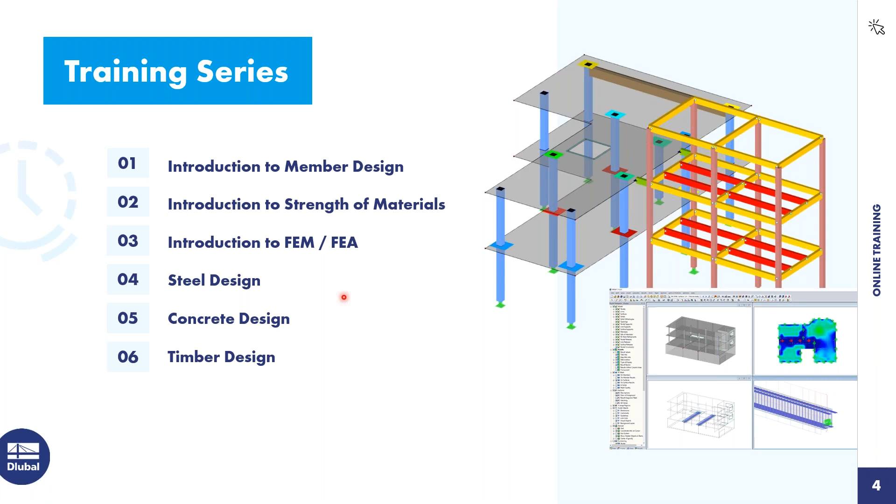Good, so our training series, 6 parts today, the 5th part, the concrete design. And what can you expect from today? First of all, we start with an introductory example. We will model together a concrete beam with a cantilever. And then I will forward to Juliane and she will show you how to design our concrete slab. So let's jump right into it.

No theory, only modeling in RFEM 6. So I will open this example and create a new model. For this case, I think it's familiar for you. I'll go to File or click on New Model. And now I create in this dialog a new model with the name concrete beam. I will leave it as a 3D type of model and everything else as set.

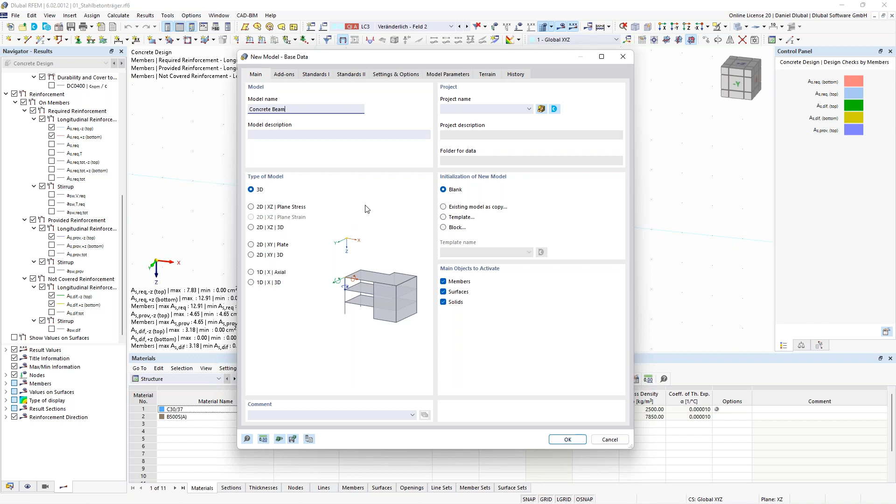Now for me, it's important to activate the add-on concrete design. So here we go to the design add-ons, activate concrete design, because then we get additional design properties for our concrete beams or concrete slabs. So I have to activate this.

When I have activated this, I go to the 3rd tab, Standards. Here in the Standards, I see different chapters like for the design, standard group, load results, and also load case classification. Here I want to design it according to the Eurocode, with this national annex of Europe. I will leave it like that and just click OK.

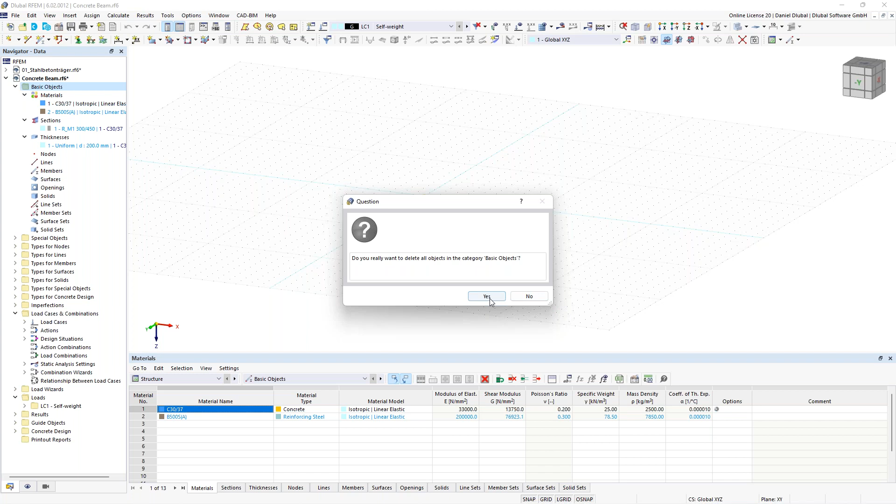And a new window opens. As you can see on the left side, I already have some materials and section thicknesses. They are remembered from the last project I did. So I will delete them in order to create all these 3 things anew, just to show you how to do it. You can click on basic objects with right click and say, delete all basic objects. Now we can create it from scratch.

Before we do this, I would like to know from you if you already have some skills in concrete design with structural analysis programs, just to give me a kind of status about your knowledge regarding your concrete design skills. So I have prepared a poll, which I will start right now. Please answer these questions in order to give me feedback about your knowledge.

Okay, most of you have voted. I close this and share the results. So most of you have already designed concrete structures in a structural analysis program, I hope it was RFEM 6 or RFEM 5. For those who don't have this experience, that doesn't matter, you'll learn it today.

So again, back to RFEM. Here on the left side in the data navigator, I will create two materials, because for concrete structures we need two materials: one concrete and one material for the reinforcing steel. I go here to new material, and one of the biggest advantages in RFEM 6 is that I can search for a material via this text box. I enter C30/37. I am from Germany, so I will design according to the Eurocode, because this is the only standard I know, and this is why I choose this one.

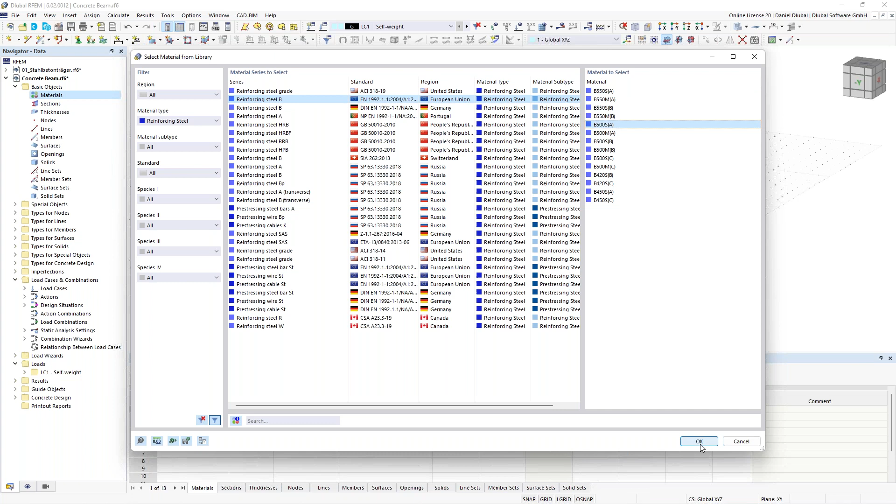Next, I create a new material again. I go to the material library and look for the material type reinforcing steel, where I can filter according to different material types, and the one I'm looking for is reinforcing steel B. Here I see different things: B500 or B550 refers to the yield strength, A and B refer to the ductility class - A is normal, B is high ductility - and S is for normal member reinforcing steel, M for mesh reinforcement. In this case I choose B500 SA, click OK, and that was it. I click OK again.

The next one is to create a new section. Since we will model and design a concrete beam, I click on section, new section, and I have to choose this rectangle massive cross section - or if you don't have it, go to the cross section library and choose massive rectangle. Then I give here the geometry: a width of 300 millimeters and a height of 450 millimeters. I can also see the section values according to this geometry and the stress points, and if I want, I can show the unit stresses. Not so important in concrete design, but we have implemented it here too. That's everything, I click OK.

Thicknesses, I won't do right now - this will be more the part of Juliane, because she will show you what thicknesses are. Thicknesses are similar to the cross-section things for members. It's a similar concept: thicknesses you need for surfaces, and sections for members.

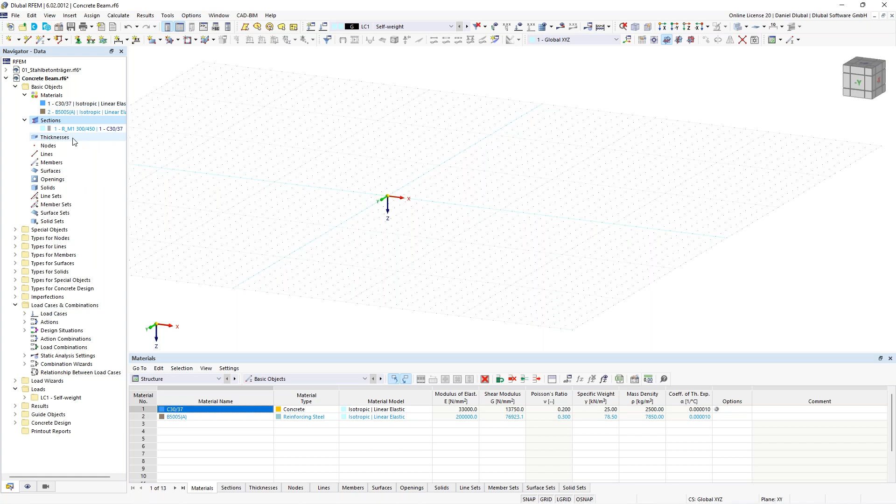Okay, so now we will model it together. We will model the beam. I go to the symbol bar, click new single member, and choose the right section since I only have one. That's everything, so I click OK and draw this member 8 meters long. I can do this via the grid points or by inserting the member length, like 8 meters. As you can already see, we already have the provided reinforcement based on some general information about this concrete beam. We can modify it afterwards, of course.

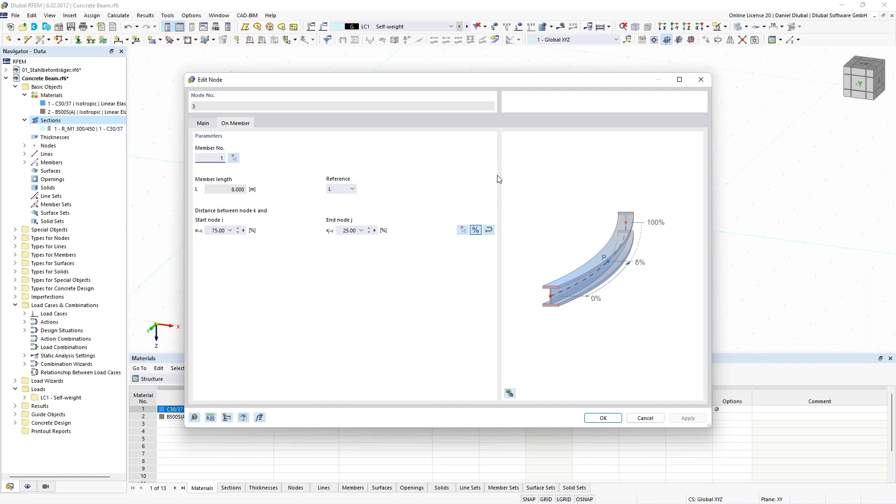What I want to do now is divide this member internally, so the member remains as one member, but we add an internal node. Double click the member, activate the option nodes on member, and switch to an absolute distance. I say from start, please 6 meters away, and here you should create a new node. I click OK, and you see this blue node. Double click this node - it has the node type 'on member'. This is a really nice opportunity, giving this node the option to be part of this member without dividing it.

Okay, so the next thing: supports, node support. I create a new nodal support. I want to activate the rotational around the global X axis in order to prevent torsion, and then a roller support along the X axis. This is this one, I click OK. Perfect, okay, so much for the modeling.

Now let's go to the load cases. I go to the symbol bar, edit active load case, and here I have the self-weight - this is okay for me. Now I also want to consider an imposed load case. In this case we have two fields, one field and the second field, so I create the first one: imposed load field 1. Now I copy it and create field 2. Now I choose load case 1, because then I jump to load case 1 where I set some loadings.

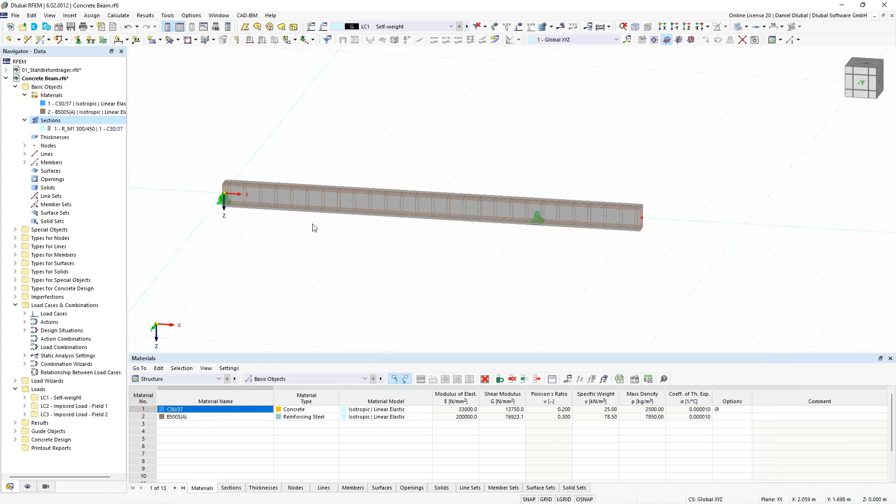So the whole concrete beam has a member load of 10 kilonewton per meter. I click here on member load and insert a value of 10 kilonewton per meter.

Now the biggest advantage here in RFEM 6 is that I can stay here in this dialog, just select the same member, and then afterwards just change the load case and add parameters like the load magnitude again to the members. I don't have to leave this window. This is a real good advantage.

So I click here on this member, say apply and next. Now I change the load case, and now I have to change the load distribution because we only want to apply the load on the left field. So I say trapezoidal. Here I have 20 kilonewton per meter, 20 kilonewton per meter on the right side, and the load distance goes from 0 to 6 meters.

I say in this member, please apply and next. Now I change the field and say from 6 to 8. I can insert here 1, say okay. Now let's do a check. Okay, seems good. So back to the load cases.

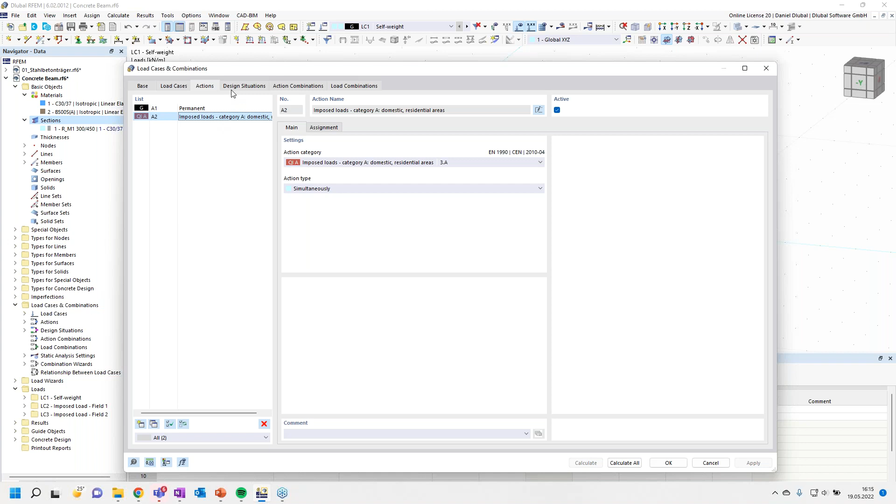Maybe a few words to that. So we have here this load case classification according to this European standard, the Eurocode, and we have also this combination wizard, which helps me combine different load cases with each other, considering the partial factors. We see here also these different actions, and depending on these actions, it will get me the right factors for combining it, and according to the design situations, it will combine it.

So you can also take a closer look at the combination rules, like here. And for our simple example, we don't need so many design situations. So these two serviceability design situations, like characteristic and frequent, I will delete. I only need this ultimate limit state and this serviceability design situation, quasi-permanent.

And let's go to the action combinations. Here, these are the factors I need for my load combination. Okay, good, this is everything. Now click on OK. And now I need to define my design properties for my concrete design.

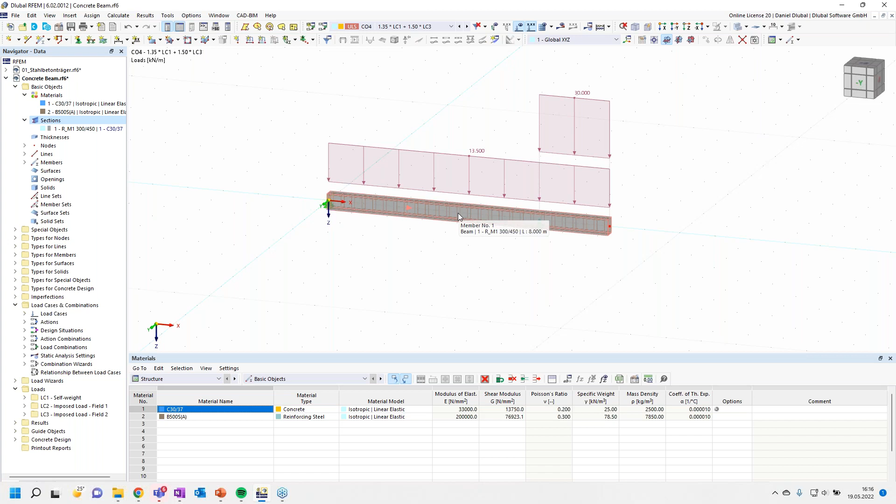So where can I do this? Double click on the member of this concrete member, and now you see here the design properties. When I have activated the add-on in the base data for concrete design, then this option will be activated automatically. I can also deactivate this, and now you see all these registers in the upper menu will disappear when activated. The other tabs are there.

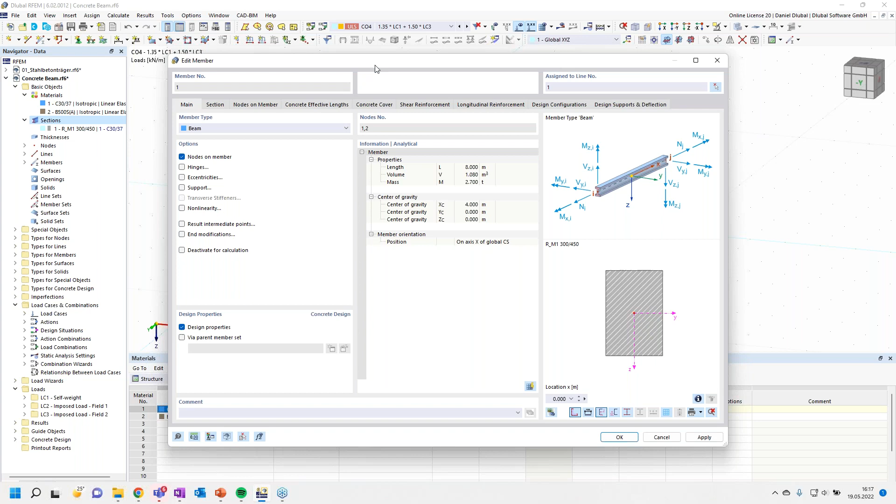So what we do now is go through these tabs. What we don't need is the concrete effective length for any stability proofs, but this is a classical bending member, so I can neglect this.

So I go here to the concrete cover. The concrete cover is pretty clear. You have different exposition classes in order to determine the concrete durability. So you can open this. Now it's for all section sides. You can modify it. You see here these different exposure classes, or exposition classes - this was the wrong word.

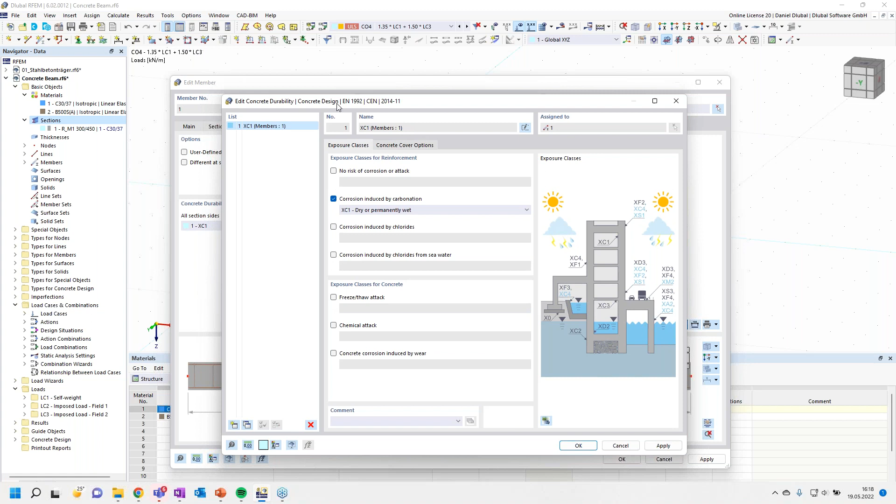Exposure classes. Here you have XC1 up to XC4 due to corrosion induced by carbonation, or also here when I want to consider exposure classes for concrete freeze-thaw attack, and so on. Through these exposure classes, the minimum concrete cover is determined.

So for our simple example, this simple XC1 is okay. I say okay again, and this minimum concrete cover is determined from the outer edge of the concrete rectangle to the outer edge of my stirrup reinforcement. And these are 20 millimeters, determined by the exposure classes.

I can also say a user-defined concrete cover, or when I want to consider it for each side differently, I can activate here also this different at section sides option. Okay, so much to the concrete cover. Now let's go to the shear reinforcement.

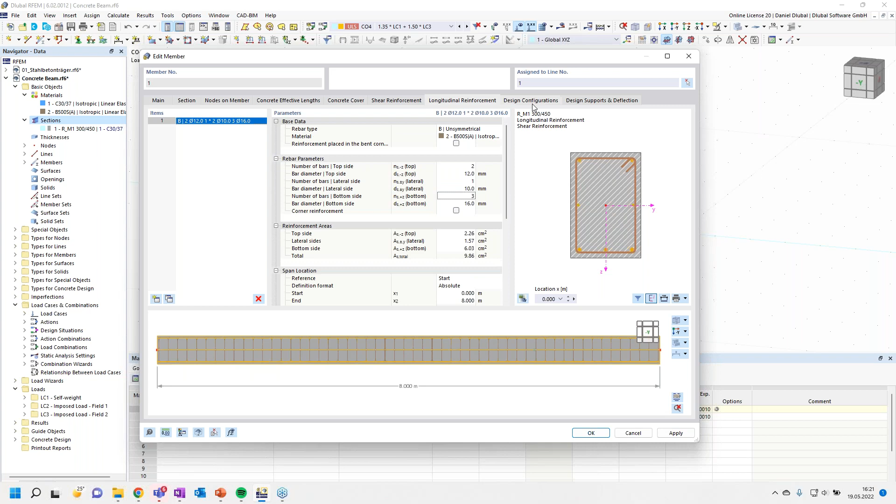Now, design configuration. Here you find more information about the different design parameters, like design parameters regarding considering internal forces for concrete design and so much more, also the reduction of internal forces in Z direction. In this case, I activate the limited moment redistribution of the supporting moments, and also the reduction of the moments at the face of monolithic support according to this standard.

So yeah, here you can define also several other options for the design of concrete. These are the information given by the standards. And the same also for the serviceability, with some more information.

Now the last tab is the design supports and deflection. When you want to design the deflections, the deformation proof, you have defined here different design supports. We do this for this simple beam. I create a new one with a support width of 360 millimeters, no inner support, only support in Z-axis.

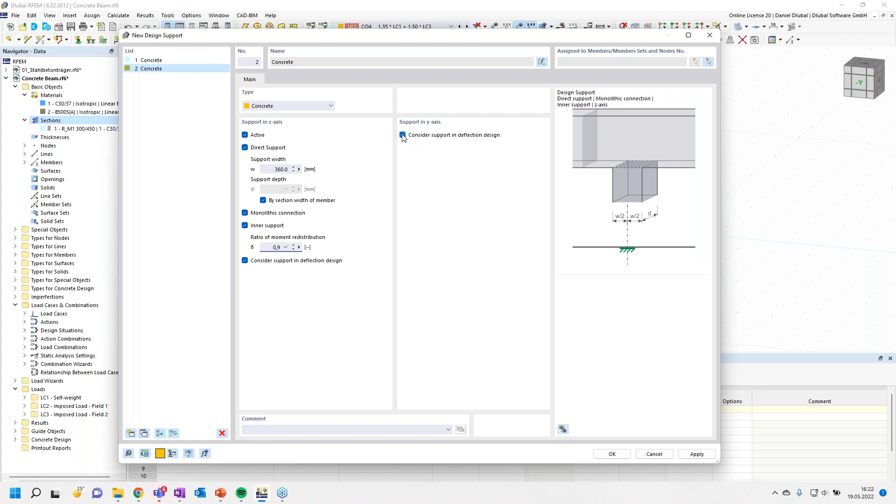Now I create a new one, also with 360 millimeters. It has a monolithic connection, and the ratio of moment is in this case 0.9, and I don't need to consider any Y-axis. I click on OK.

Now I have to assign it to the right nodes. So that is on member start, this is correct. And now here to the middle, the second one... no, this is not correct. Now this is correct. I say OK.

And now I can calculate it. Let's say concrete design. And now you see how the whole situations are calculated, also for the serviceability.

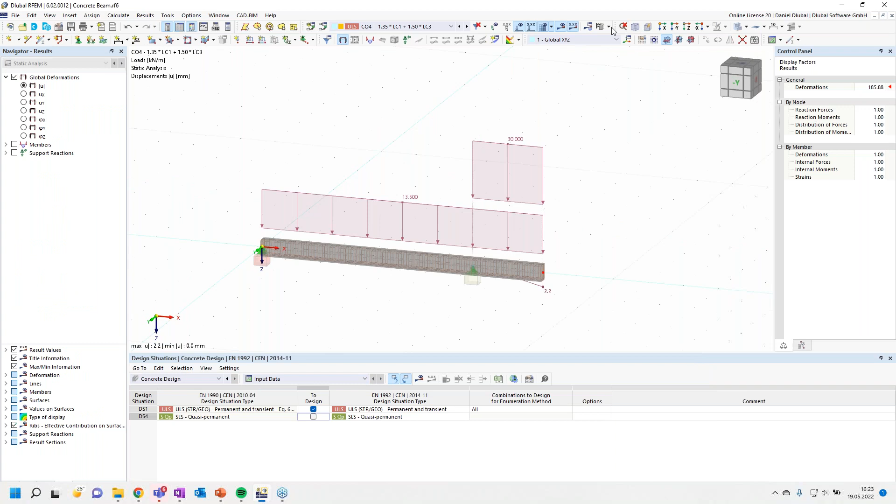What I don't need is to design for the serviceability limit state, I only am interested in the results of my ultimate limit state. So I calculate the concrete design again. And now I see here the different design ratios for members, and I see detailing of members, and also the ultimate limit state section resistance is not fulfilled.

So what can I do? I need to strengthen my reinforcement.

Maybe here some words to this reinforcement. Here on the left side, I see the results navigator, and here I have the possibility to show me different results, like the reinforcement.

So I see here the required reinforcement for the top and the bottom, maybe I deactivate the design check. I can show me the required reinforcement for the top and the bottom, I can show me also the stirrups and also the provided reinforcement for the bottom side.

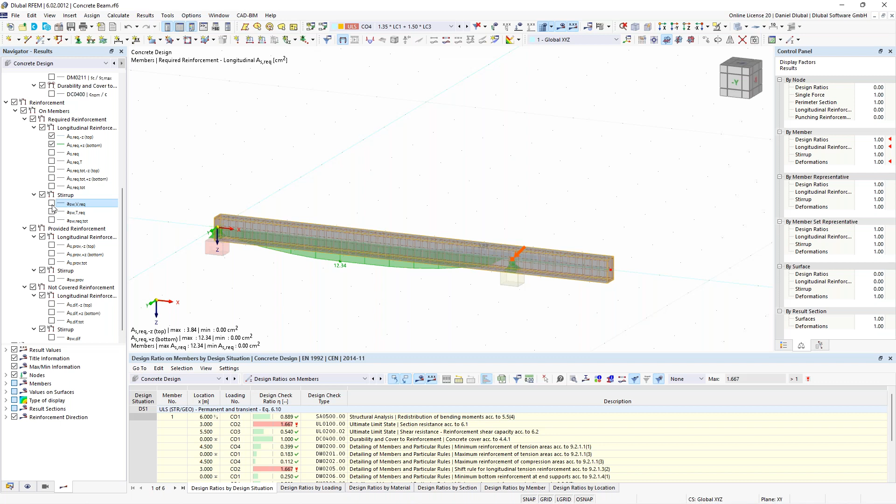And I can deactivate here the rendering of the reinforcement by going here to the display navigator, go here to types of concrete design and deactivate it. And now I can see here the result a little bit better. So I see, okay, my provided reinforcement is lower than the required reinforcement.

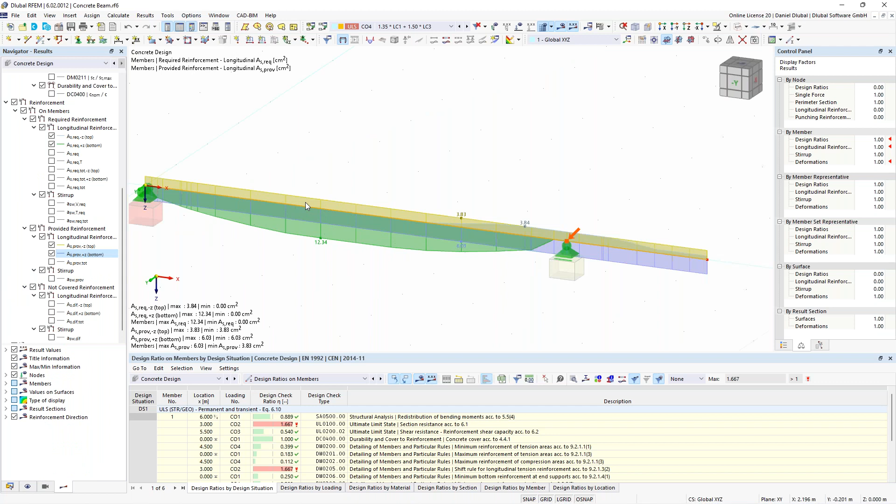So I need to add some more rebars. And also in order to calculate here the difference, what I need, so the not covered reinforcement, I can also show me it. Okay, so what can I do?

Go back to the concrete beam, go here to the shear reinforcement. Now we want to add more rebars for some places. So I go here and copy it.

And now I want to cover it for different fields. So you see, okay, the start and end goes from 0 to 4. I say, okay, this should go to 6. And this one should go from 5 to 7 with distance of 0.1 meter. And the other one should go from 7 to 8 meters. And the longitudinal reinforcement, let's make it quite easy.

So what can I do here is just increase the diameter for my top side and add here a diameter for the bottom side to 20 with 2 bars more. And it looks like that. I can show me also this reinforcement plan by clicking here this icon, and I see it here like that. Then I click OK, I design it again.

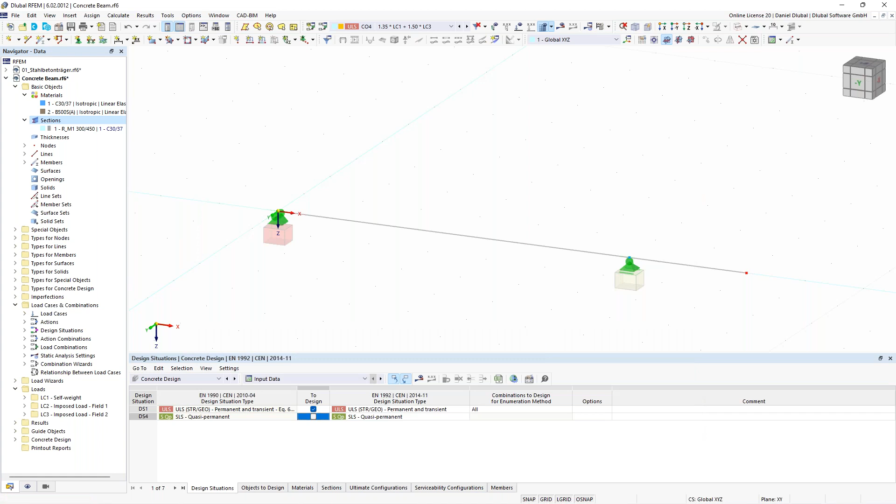And now I see here my fulfilled design check ratios. And by clicking on one of this, like this one, you see also here this design check. Also, you can switch here to different design checks. So in this case, we have here the design check according to this standard, shear resistance, reinforcement shear capacity.

And when you are studying and you want to compare your results with the results of our program, then you have here an overview of how the program did this. Okay, so much to the beam design.

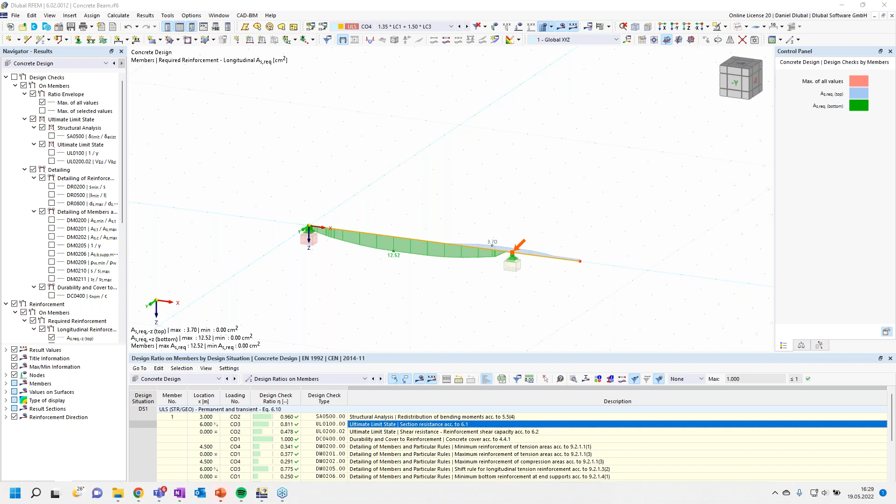The parts of the structure will be of material C30/37, and the wall and columns will have concrete C25/30. We will have the self-weight as a load and apply also a live load of 3 kilonewtons per meter square.

Then we will again do the load combinations and let the program generate them for us. After that, we will do the analysis and use the results for the concrete design. So this is it so far as a preparation.

Now we can go into the program and start modeling. I will open a new model with this icon, and we get into the base data dialog. I enter the name, it will be a slab, made of reinforced concrete, and I give this as additional information.

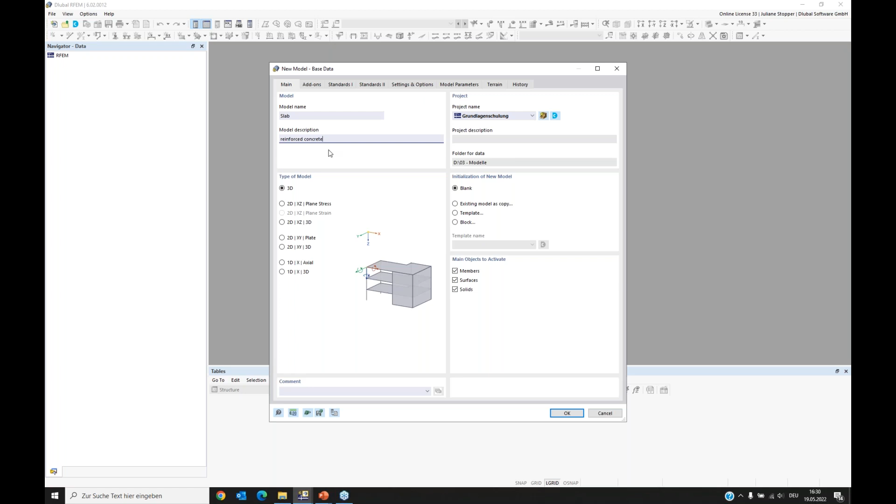The other settings we don't need to change. Again, we have to activate our design add-on, the concrete design, and in the standards I also want to keep the National Annex CEN, as Daniel did. So we can agree and say okay, this is okay.

So now an empty model is prepared for us and we can start modeling. I would like to use a guide object with you, a background layer.

We have a drawing from the architect in DXF format, and we can use it as orientation to create our RFEM6 model. I get the file from my folder and have here the ground plan for our slab. We have the preview, and checking it I can see I need to rotate it by an angle of 180 degrees around the y-axis.

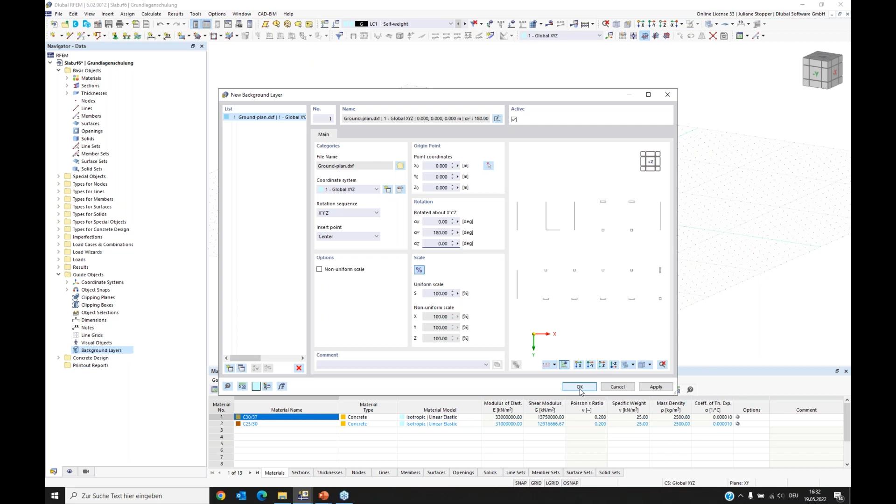Now in my preview, I see this is what I wanted. I want the ground plan positioned like this as a background layer. So I can say okay, and I have it in my model now.

So all these lines are DXF objects. Now I need to create my objects that I can use for the RFEM6 model and the analysis. At first I want to start with the lines. I will create the boundary lines for the slab. We have one here, and we have one here.

If you want to end any process you are in, you can do it with right click, and you can leave the thing you are doing currently.

So now I want to copy this line. I select it, press Control, click on the line and draw it to here. Okay, and I will do the same with this line. I press Control and put it here, and I've finished my boundary lines.

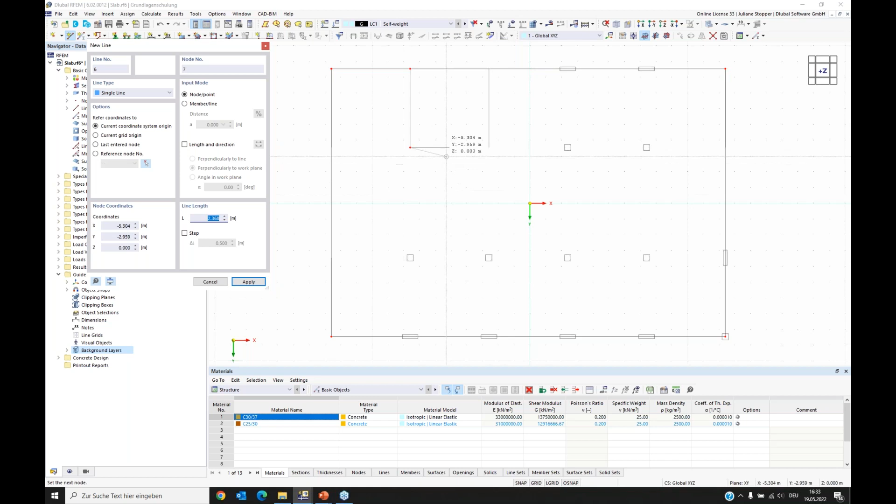Then I also want to have lines here, because the lines we see are DXF objects, and I need to have parts of the structure modeled with RFEM6 objects.

Okay, so what I also need is nodes. I need nodes for the places where the supports or columns are placed. So I put some nodes. I will do it here.

And I can see that I need an X value of 2.40, but I cannot reach here correctly. So I put this node here, and another one here. And now I can edit this node. I double clicked on it and I can see the coordinates here.

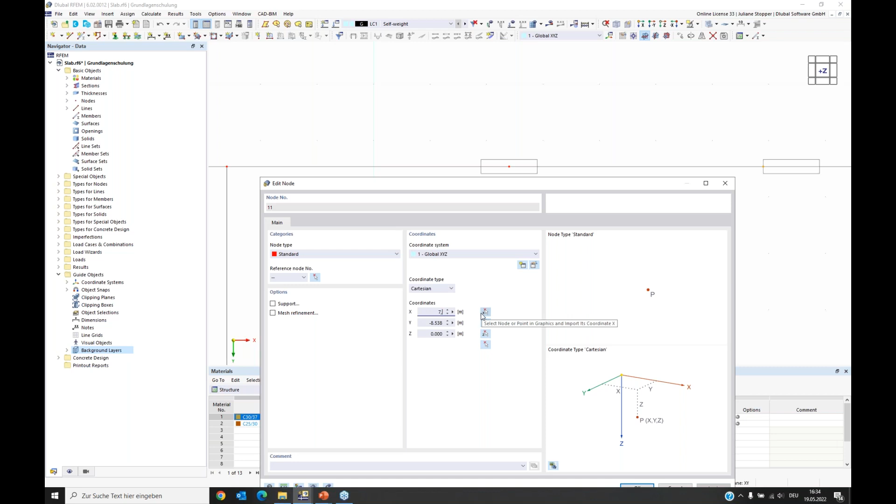And as we saw, I need 2.40. I can say okay, and it goes there. And here I checked it, I need 7.40, and then it will be at the right place. So now I prepared the nodes on that line, and I need them in this line and this axis as well.

So I have to select them. I want to copy them.

With pressing Control, I can again and again add the selection. Okay, now I want to use drag and drop. I again press Control and I can take the node and copies are created, and I can put them at the place where I want them. Here's the end of the wall and it fits. And now I can see the newly created nodes again are selected, so I can go on with them.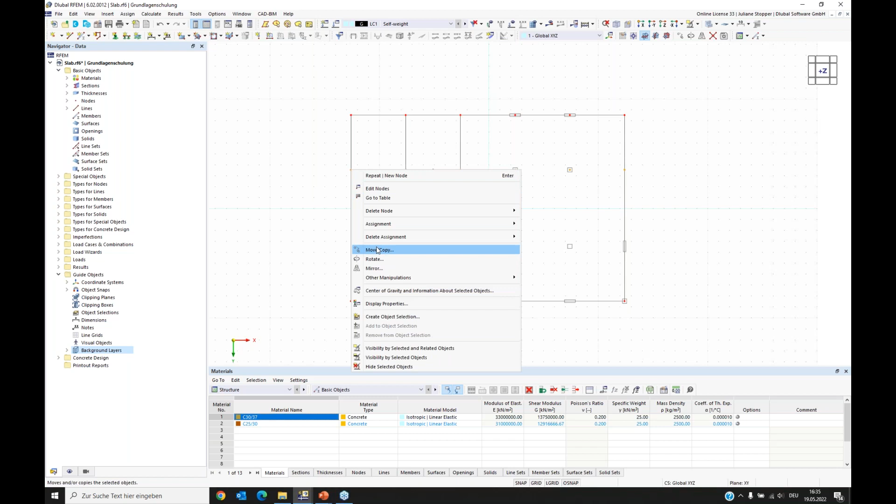Now I want to show you this menu. I did a right click on the node. I also can use this move and copy option. I say I want to create a copy and I have to give the displacement vector here. And now I want a vector like this. I can say apply, and I can see the program copied it, and I can repeat this and do another copy into this row and say OK. And now I see I have all the nodes that I need for modeling.

Now there is one thing I want to do. I want to divide this line into parts, because when I want to define the surface, I want the surface to be within these lines. So I shouldn't have a line that is not divided. In order to do this, I select all my lines and I can use this option here. And now every line is divided at the nodes or lines that it's connected with.

Okay, now I prepared the first step of the geometry. Now I also want to use the data navigator and work from top to bottom like this. At first we want to check the materials, have a look at the list.

I also have the first two materials from my last model and I want to use them with you. It's the C30/37 and also the C25/30 that we need. One material is missing, our reinforcement steel. So we go to the library and choose for European Union the steel, and I want to have this.

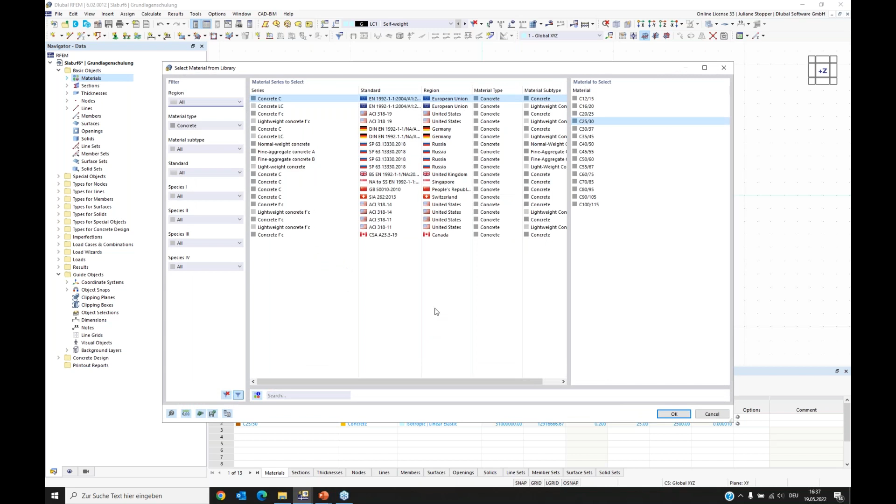What I remembered now is here I will check this. We will have a look here. No, it's okay. I checked the standard because it's important that the standard fits to the standard you selected at the beginning. But it fits, I have the right standard. Okay, so now my material list is fine.

I can say OK and leave this dialog. Then we can go to sections. And I also want to delete it so that we can create it together. We create a new section. And yeah, it's right, it's going to be the section of our L-beam. And it has the same material like the slab.

And here we have provided cross-section types for beams, and we are right, we want to use the rectangular. We can go to this dialog for entering the dimensions. Now I will show you. We want to create our L-beam, so we have 24 centimeters and 45 centimeters in the height.

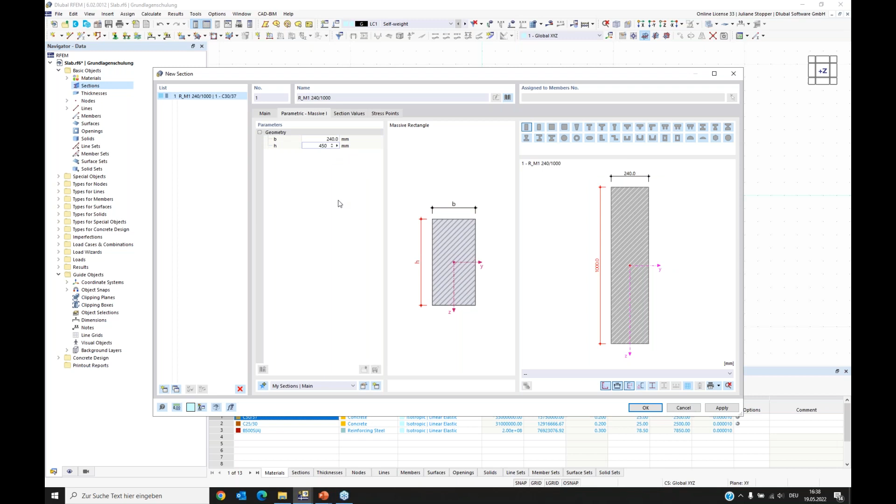And we can enter this: 24 centimeters and 45 centimeters, so 450 millimeters. Okay, then I have my section prepared for the L-beam, and I also will prepare the thickness that I need for the surface. As Daniel said, for beams, for 1D members, you need 2D cross sections, and for our surface, which is a 2D member, we need only to define the third dimension, the thickness for it.

So we can go here. We have the dialog for the thickness. It shall be a uniform thickness. This is right, it's the material for the slab. It's also right, but it has to be 24 centimeters, so 240 millimeters. Okay, and I say okay.

Now I prepared my cross sections. Then I can go on with creating the surface. I could do this from here, but I want to use an option we can reach here more easily. We can define a surface via the selection of boundary lines, and this is what I want to use now.

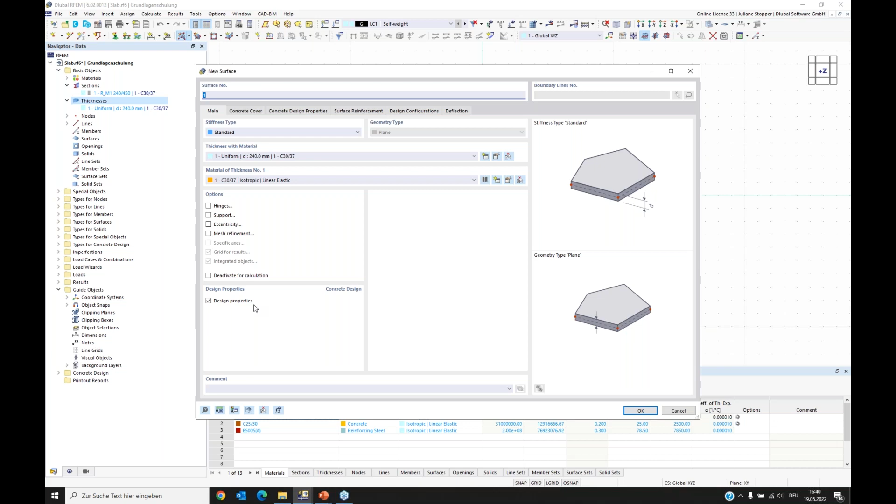Here we see the dialog for the surface. Here we can enter all the things, all the options the surface has, all the settings and input the surface needs. And it shall be a stiffness type standard. This is good, we have the right thickness and the right material. As we can see, because we applied the concrete design add-on, we also have design properties. Those I want to have a look with you at later. Okay, so we can agree. And now the program, if we go into our working window, the program tells us what to do. You can read it here.

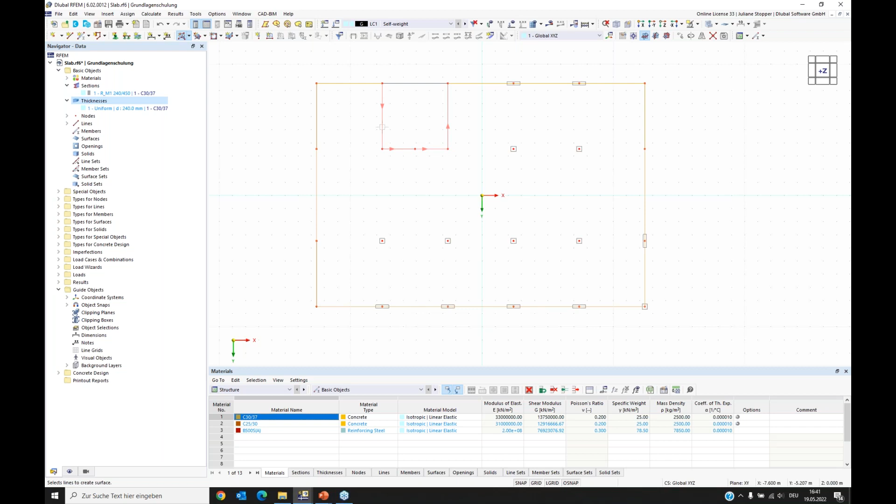When I go back with my mouse into the field, we can see that now we are supposed to select the lines for creating the surface. So I just select the lines, and RFEM6 created the slab, the surface. Okay, I can leave this.

I do a right click, and now I'm free again. So now I want to create the L-beams. The L-beams are positioned everywhere where no wall is positioned at the border lines. So I select all the lines that will get or receive an L-beam between the columns. Here's going to be a wall, so I go on here. We have a wall here. Here shall be an L-beam, and here are going to be walls. So my lines are selected.

I can do a right click on the line and say edit lines, and I come into the dialog for editing lines. Here I have the option to say that for these lines, there shall be a member along these lines. Then we activate it, and when we activate it, we get into the dialog for defining the member. Here we can see the member type we have to set in the main window.

We have a special member type for L-beams or T-beams. It's called RIB in RFEM6, and I selected it. Here you can see we want this type of member. And with entering RIB, we see that a new register opened, and we have to look at it. Here you can decide whether your beam shall be below or above or maybe centric in the surface. We choose the one it shall be positioned below. Okay, then we can go on.

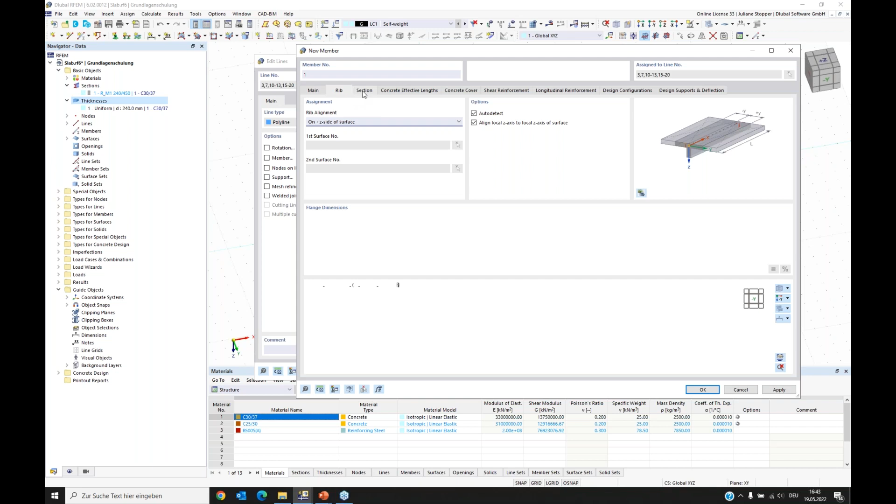We go into section. We have to define the section for the member, for the part below of the surface. And RFEM6 automatically applied the first cross section that we defined. So this is the right one. This is the one we defined, and the material is right as well.

We can say okay. What I want to do is switch off the design properties, because today our main focus is on the slab, and we don't want to analyze the design for the RIB as well. So I switch off the design properties. The program then knows that these RIBs shall not be considered in the concrete design. I say okay and leave this dialog. Now all these lines have these members that we defined applied, and we can see it in the main window.

Now we finished actually the structure. As I said, we want to have the design for the slab, so we are not interested in the inner forces or stresses or strains in the walls or in the columns. That's why we don't need to model them.

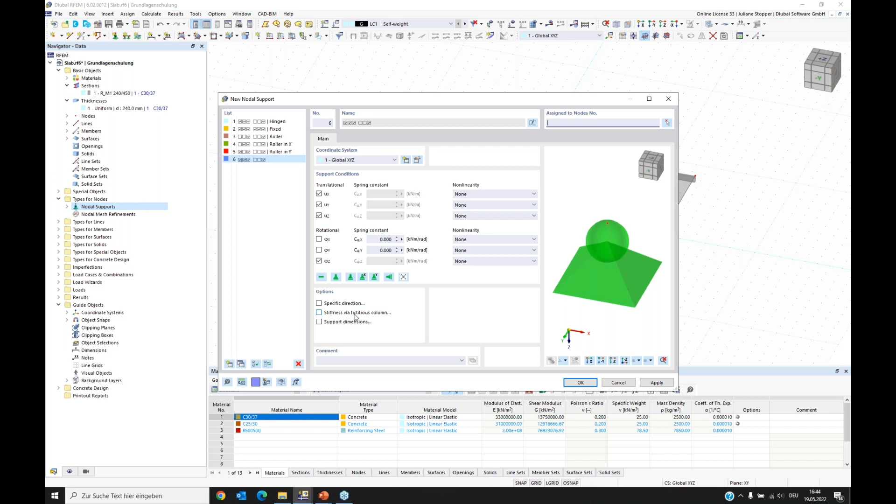We have a special type of supports that I want to show you. First, we go into the types for nodes. Here we can find nodal supports, and I want to create a new one. We have in RFEM6 the option to give a support that contains the stiffness via fictitious column. This means I can activate it, and then a new register is opened and we have a look at it.

Here we can enter the dimensions and the material of the column, and RFEM6 from this information calculates the stiffness the column has. So we can model a support that behaves, from a point of stiffness, like a column behaves, but we don't need to model the column, and we don't get inner forces or something. We are not interested in it.

So I can choose here elastic nodal support. This is what I want to have. Our column has dimension 40 centimeter and 40 centimeter in the other direction, and it has a height of 2.25 meter. Yes, and it is hinged at base and head. And I have to take care, I should change the material. We have less stiff material here, and this is the stiffness of the spring the program calculates from these column dimensions and material.

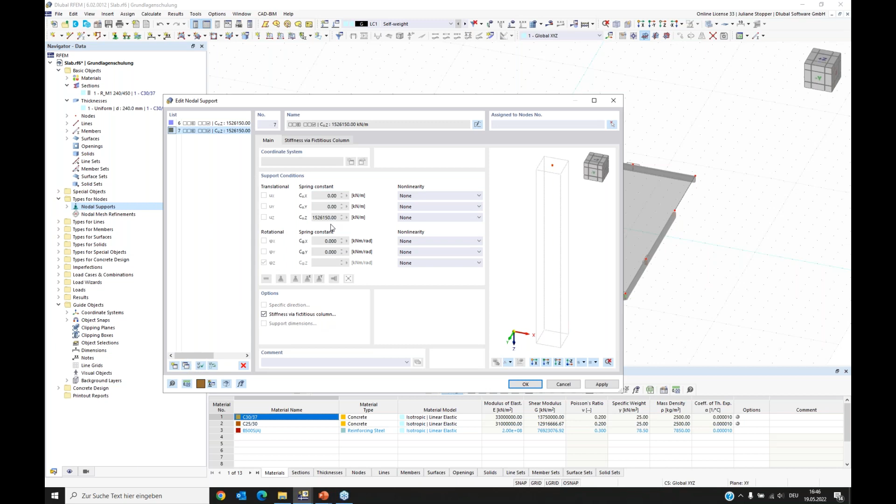It fits 25 centimeters in the height. The height of the column is 3.25 meters. This is right. And the other settings we can keep, it's right from the copy.

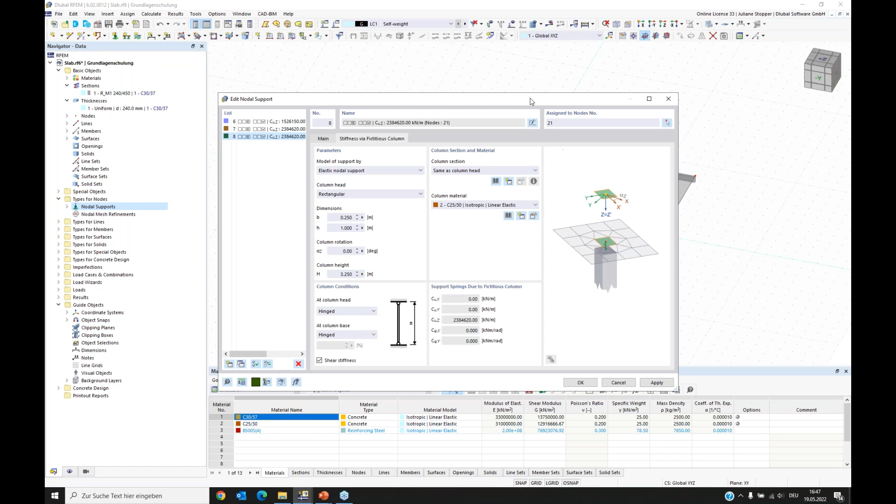Okay, and I can apply these columns here, and say apply again, and I can create a last copy. Here I change only the width and height, and I can apply this or assign this to this node. Now I have all my different types of columns defined, or the supports of them.

And we can see it here. I can also change the display of the model. I can say that I want to see a wireframe model. Then we can see, for example, the supports more clearly. And if you think the supports are a bit small, you can right click on them and make them bigger, then it's more easy to see them and check whether a support is everywhere it's supposed to be. Okay, we have the same tool for walls.

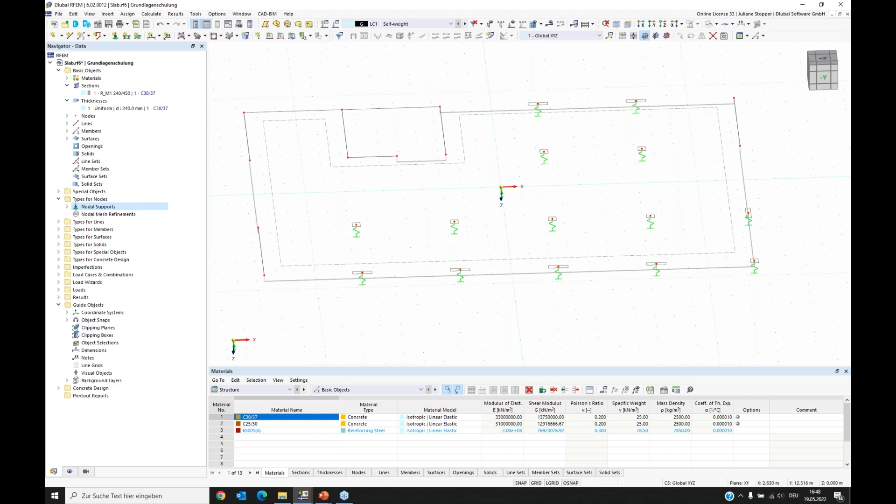We can consider the walls as line supports, so we can now go into the folder types for lines, and here we have the line supports and can create a new line support. Here I have the stiffness via fictitious wall, and I can only reach this option if I activate local XYZ coordinate system. Now you can see it's possible to activate it, and we again have to go define geometry and material. The wall has a thickness of 24 centimeters and again a height of 3 meters 25.

The material also shall be material number 2, and now the program calculated the stiffness that resembles the wall. The X direction is the direction along the length of the line, so we have a stiffness in this direction, and the Z direction is the vertical direction. We have also this spring.

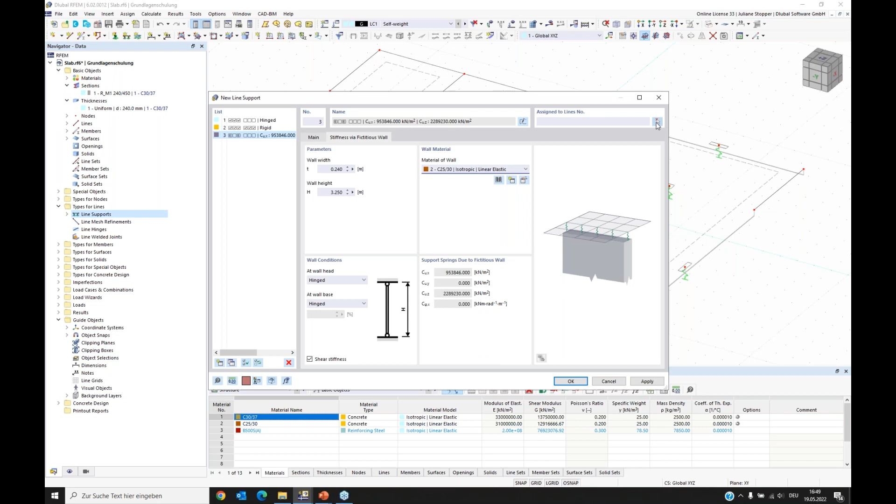Okay, now we can assign it to the lines where we have actually walls, and they are these. And here's another one, and I think it's completed. I can say okay, and we are now fine. Now we have all the supports that we have from the walls and lines. I again go to the transparent model, and I can see our structure. We have finished the structure now.

What we need is the loads. So we can close the settings for the structure and go to the load part. At first we enter this load cases and combinations dialog. And again we activated the combination wizard as you saw with Daniel. Now we can go to load cases.

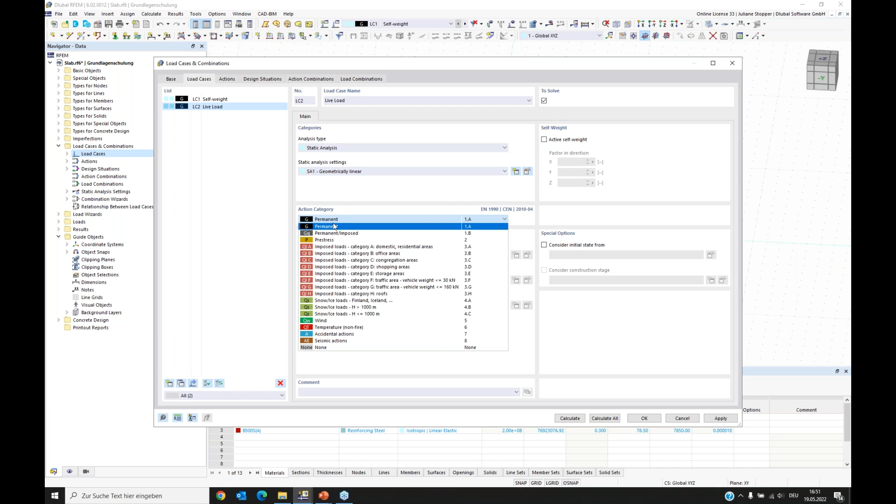We have as a default load case, load case 1 is always a self-weight load case. You can also see here the self-weight is active and it's a permanent load case. And we want to create another load case. This is the live load case, and here we don't want the self-weight to be active, and it has to be an imposed loads load case. It's important that you take care about defining the right action category, because we will do the action combinations. The combination wizard is going to generate them for us, but it can only do it right if you set the right action category. So we have a permanent load case and an imposed loads load case.

Okay, then we can have a look at this. Here you can see which type of action categories you have in your model. This helps when you have a lot of load cases in bigger models to keep an overview. Then we can go to design situations. We have those prepared for the concrete design. And I want to show you also the combination wizard. Here you can do settings for how the combination wizard shall combine or create the load combinations.

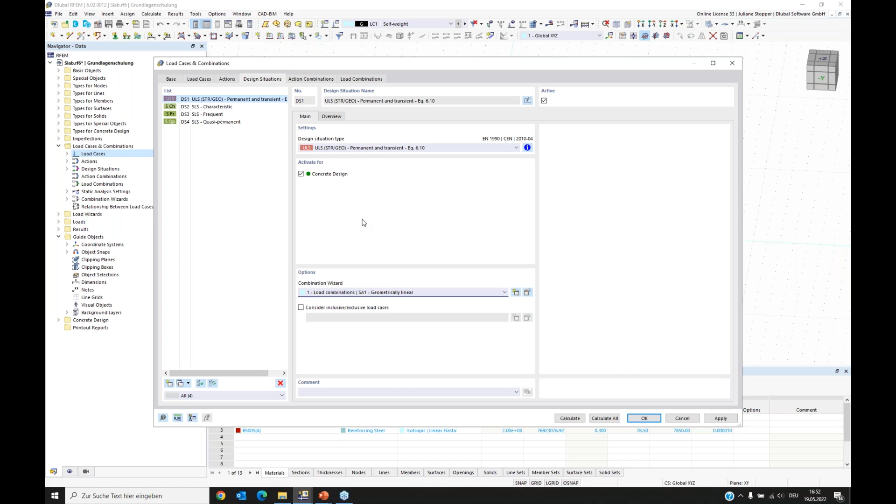And I want to use the geometrically linear analysis. I activated it here, and we don't need to consider imperfection cases, so I can set it okay. And then we can go on. We can check the action combinations and see also the load combinations that are generated from that. So now we finished that part. It's okay, we have the load cases and the combinations.

Now they are prepared and we need to fill them with loads. We have this folder loads here, and we can see our load cases, but they need to be filled. We need to say what kind of load has to be contained in the live load. In self-weight, we have a load because we said self-weight shall be active. This means the program calculates from the cross sections and the specific weight of the material, the self-weight of the structure.

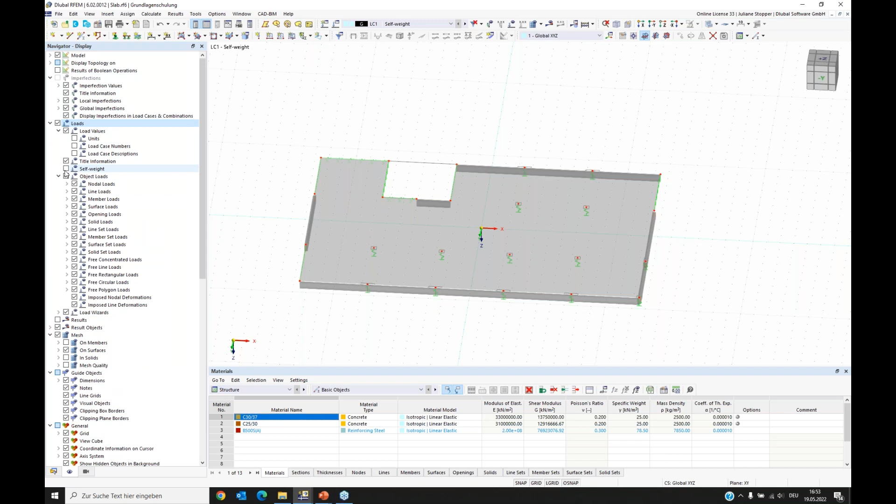So we can have a look at this. I switched from data navigator to navigator display, and here we have the option to activate loads, and within the loads we can activate the self-weight. And then you can see for load case self-weight what the program calculated for the construction parts. So we can see load case 1 has a load. Now we can go to load case 2 and we see we don't have a load yet.

So we create one. We create a surface load with right click and say new surface load, and it's supposed to be 3 kilonewton per meter square, and we apply it to surface number 1, and it's okay. And we can see now also we have a load in our live load case.

So I want to save it once. It's good to save from time to time.

Now we've prepared our model. We have the structure, the loads, and the geometric boundary conditions. Now our model is ready for the finite element analysis, so we can calculate the stresses and strains, the inner forces and displacements for this structure.

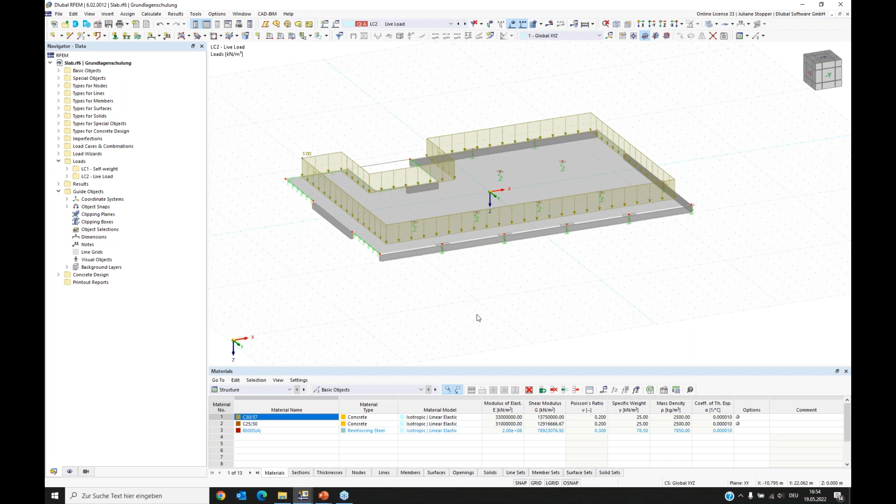What we want to do as well is the concrete design, so we have to define the properties for the concrete design. I'll double click on the surface, and we can see all the design properties that I can set. Now let's have a look at them together.

Here we have the concrete cover. I think Daniel already said a lot about it, so it's fine, we can go on.

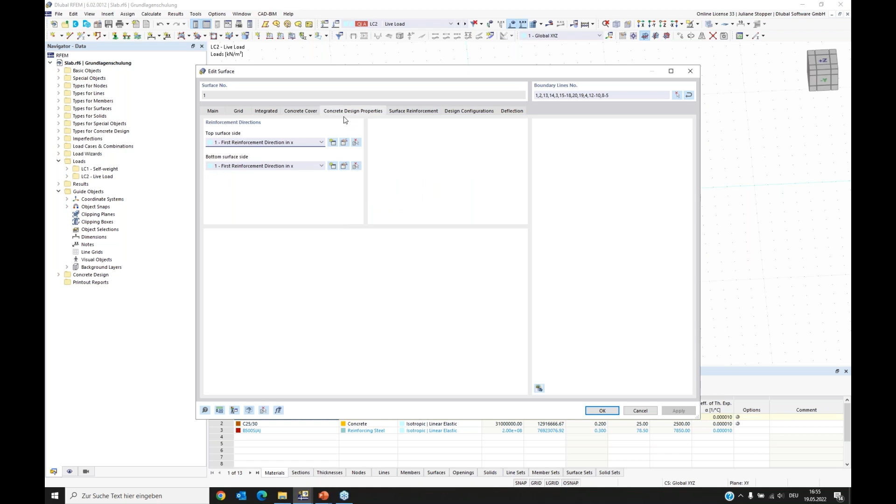For the surface we have the option to set which direction the first reinforcement direction has to be. For us it's now X, and the second one is in Y direction. That's okay for us.

We can go on. Now we have the register for surface reinforcement, and we see that our list is empty, so we have to define a surface reinforcement by clicking here. Then we get the dialog for defining new surface reinforcements.

Here we have a surface reinforcement of the type 'on surface.' This means the surface that is assigned will get this reinforcement everywhere, independent of the geometry of the surface. The whole surface will be covered with the reinforcement you define here.

I want to first define a reinforcement for the top of 8 millimeters with a distance of 15 centimeters, and in the transverse direction also 8 millimeters with the same distance. The program tells you how many centimeters squared per meter you put, and yeah, it's fine for me.

I say apply, and I copy this reinforcement because I just put it at the top. I want to create the same at the bottom for now.

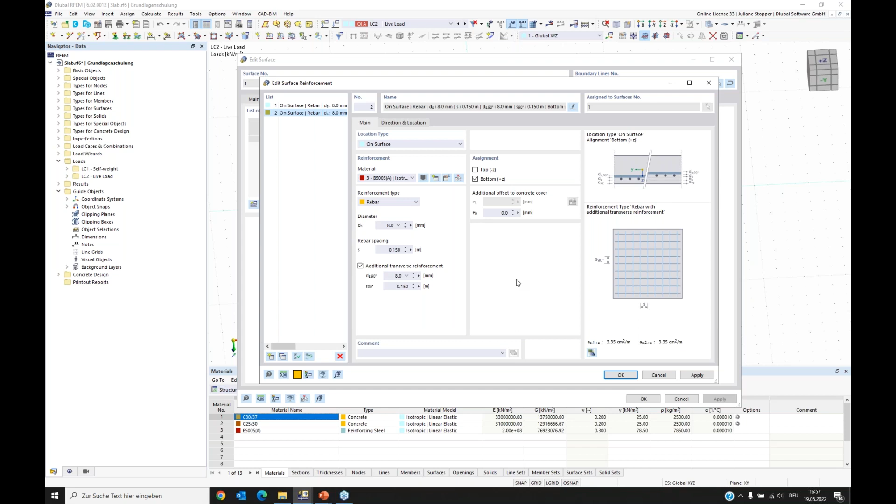So I can say okay, and now my surface has a reinforcement. Then here we again have design configurations. We can take a short look into them.

With Daniel, you already saw those. We can have a look at the surfaces - this is something you should have a look at. For now, we keep the default settings, but you should know what is decided in here.

For example, now we have minimum and maximum longitudinal reinforcement defined for plates or slabs, which is fine for us. But if you want to make the design for a wall, you should apply design configurations for walls and this setting for walls. For us, for now, it's okay.

I can say okay and keep the default setting. We have something similar for the serviceability state. Yeah, this is what I wanted to look at with you for now.

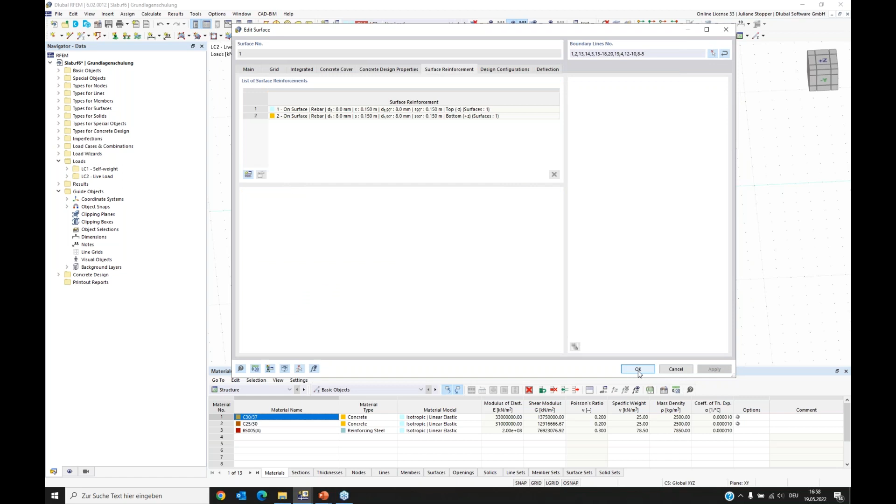We defined our surface reinforcement, and then I close it. Now we can also see it in our graphics. Here I can switch off the loads, so now I can see that my reinforcement is contained in my surface.

So this is it for us. We can now start the analysis, and I want to do it from here. We can choose the concrete design in the table, and here we have our input data.

For now with you, I want to just do the ultimate limit state analysis, so I switch off those. And in the objects to design, I want to say that I only want to solve the surface.

Actually, the program sees that the ribs, which are members, cannot be calculated - they are invalid because they don't have a reinforcement, so they wouldn't be contained in any way. Also, I switch off the nodes for punching. So we have our surface.

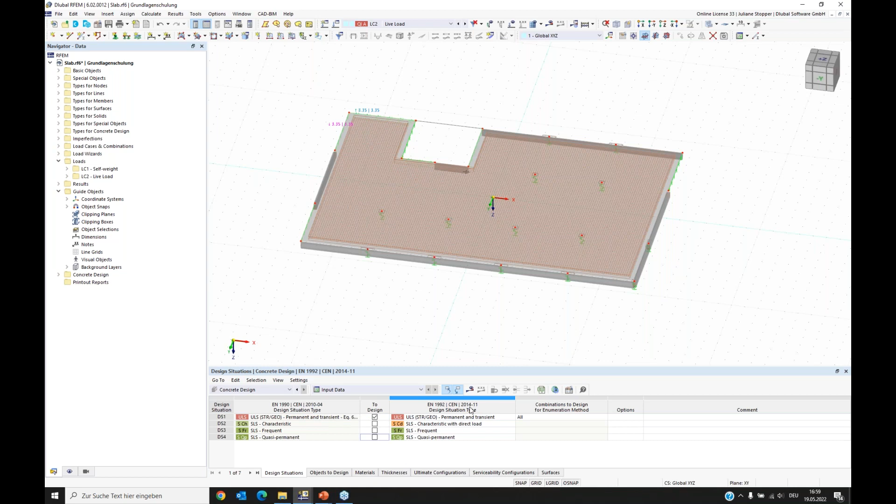Yeah, and we did these settings. Now we can start the concrete design from here. And I started it.

The program knows when we want to do the concrete design, and it also calculates the design situation needed for the concrete design, as well as the load combinations contained in that design situation. So it calculates everything needed for the design. And here we have our result.

As I said, for the concrete design we want to solve the ultimate limit state, which uses design situation 1, and design situation 1 contains all the ultimate limit state load combinations. So if we check one of them, we see we also have results for those.

What I want to show you also is here we have our navigator results. Here we can decide about the view on results, and set it to static analysis. Here we have our results of the finite element analysis. I will switch off the mesh, we don't need it. Here we have global deformations, internal forces, stresses and strains, and these results are used in the concrete design.

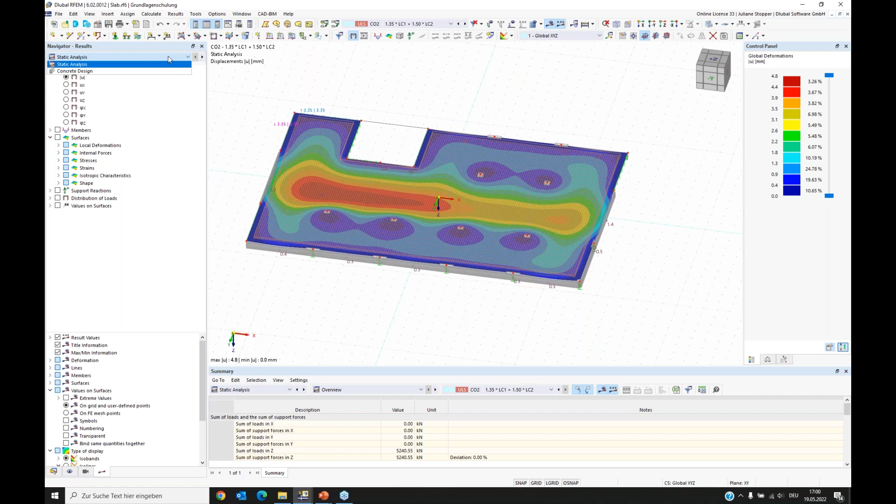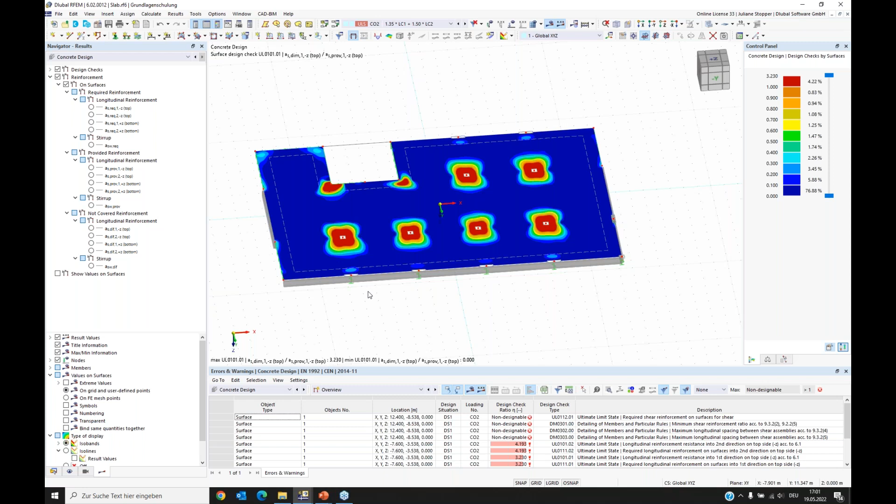So now we have our first design results. At first I want to show you this: this is the overview for the design, and at the beginning it doesn't look very friendly, as all the problem points are listed here. You see a lot of red at the beginning, but this will change.

I can say that I don't want to have this overview. I want to see, for example, design ratios on surfaces. If you have more surfaces, you can also set it to show them separately for each surface, but we only have one now, so this list is fine for us.

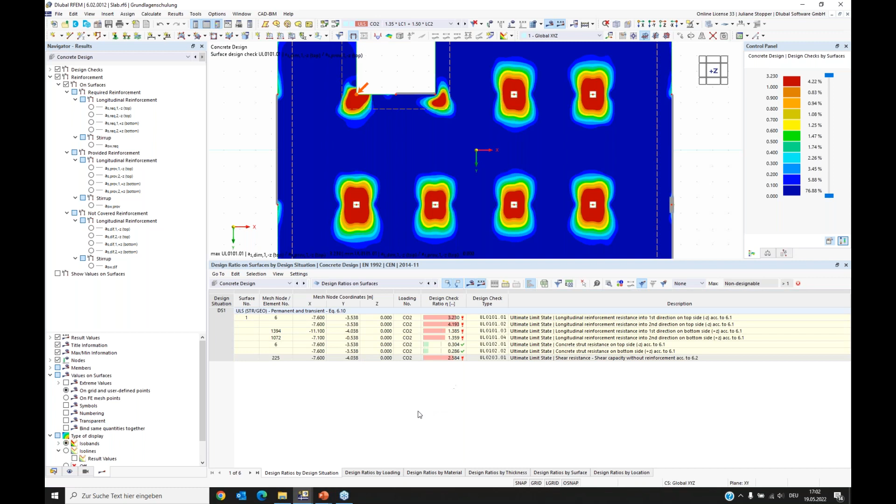Here we can set which design checks we want to see, which design check types. Now we have the ultimate limit state active, and here detailing proofs are also active, but I don't want to look at them now. We only want to check the ultimate limit state at first, which is also the much more important thing.

Okay, so now we can have a look at the navigator results a little bit more in detail. We have two main things we can look at: we can look at the design checks or at the reinforcement. At first, I want to have a look with you at the design checks for surfaces.

And now we are looking at this one, UL0101, which is for longitudinal reinforcement in the first direction on the top side of the surface. This is something we can imagine and expect: we have the highest ratios around the supports. So at the top of the surface we have tension around the supports or above the supports. And the same is true in the second reinforcement direction, as we can see.

Now we can guess what will happen if we look at the bottom side of the surface. Here we can see that we have the most tension and the highest ratio for these checks in the fields of the surface, as there is tension at the bottom.

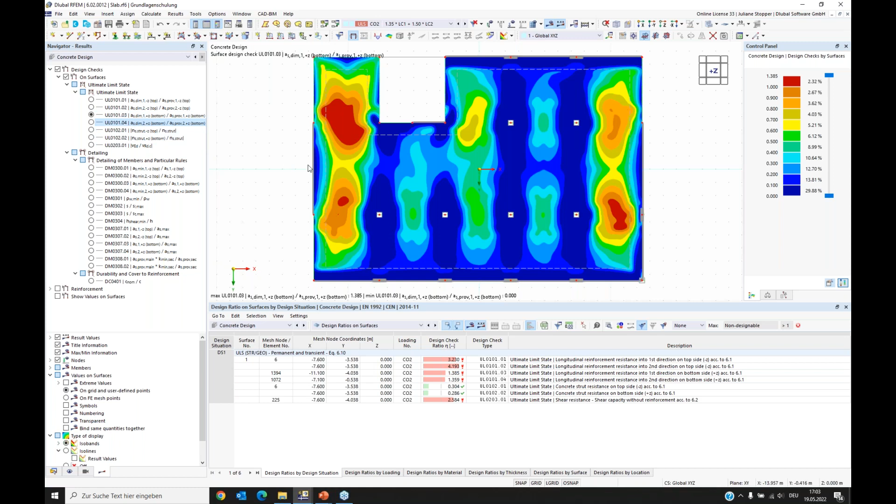Okay, these were the results of the design checks. Now we can have a look at the reinforcement the program calculated from doing these design checks. We can see which reinforcement is required from all these design checks. Let's look at the top: here we can see how many centimeters squared per meter are needed, for top in direction 1 and direction 2, and also for the bottom of the surface.

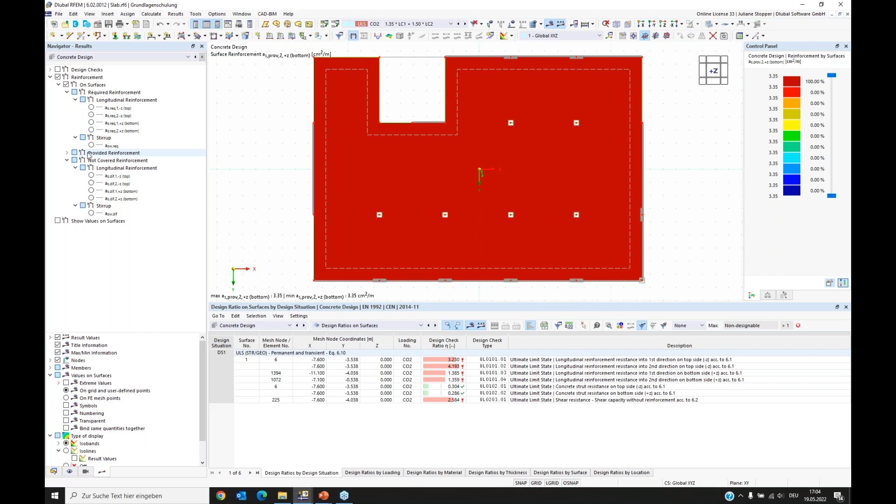What we also can see is which reinforcement we provided. We put reinforcement in there, and here we can see it - it's 3.35, put in each direction at the bottom and at the top. The program also gives an overview of the not-covered reinforcement, comparing the provided and required reinforcement and showing where our provided reinforcement is not enough.

There we can see at the top of the surface, in this area, we don't have enough reinforcement in this direction, and in the second direction like this, and also here in the fields. So the first step I want to go through with you is changing the bottom surface reinforcement. I go back to the data navigator - before I went to the design properties by clicking on the surface, but now I want to show you that all these concrete design settings can also be found in the data navigator.

We have here the types for concrete design, and here are all our reinforcements in the whole model. And here we have the configurations for the concrete design.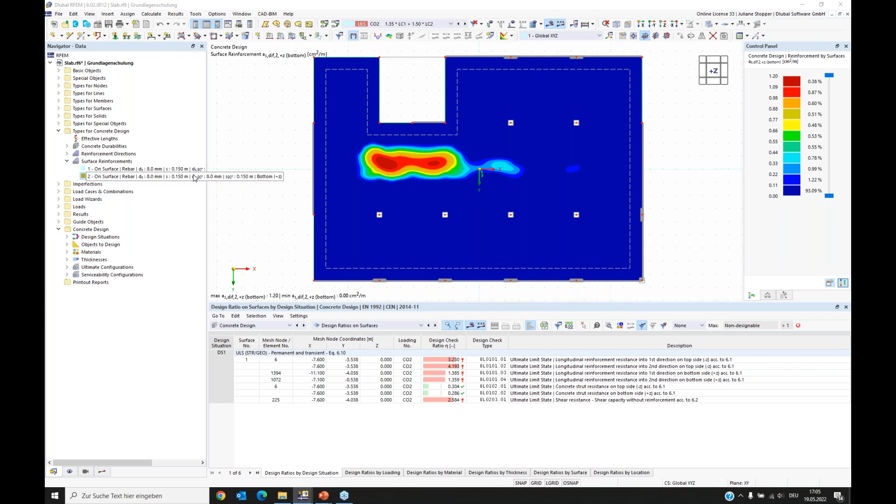But now we want to change our reinforcement. The second reinforcement, as we can see, is for the bottom. I double click on it and I can edit it. Now I want to put the diameter 1 centimeter at the bottom of the surface. I say OK, and the program gives a warning because our design results will be deleted since I changed the reinforcement. It's OK for us, and I can recalculate the concrete design.

So now we can have a look into the not covered reinforcement, and we can see I put enough. We don't have any problems at the bottom of the surface. Now we want to care about the top. I didn't change anything yet in the top.

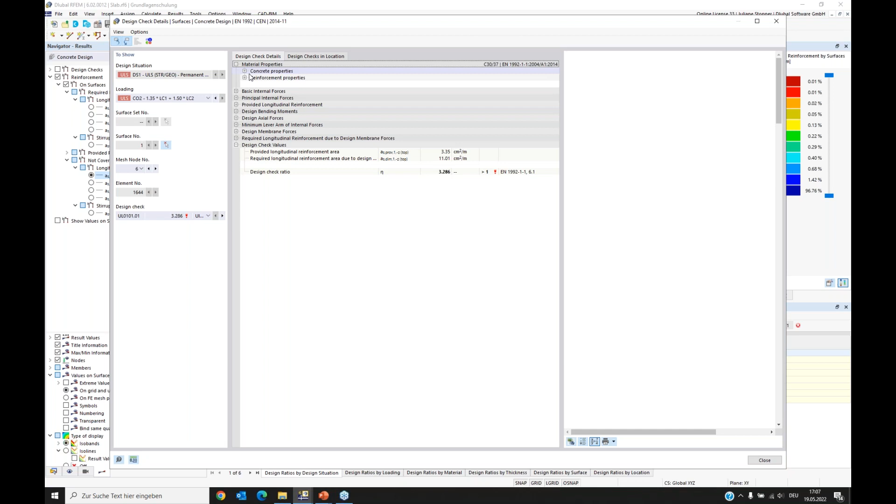What you always can do is, if you go here on the design ratios, you can have a look at these positions where the ratio is too high. Like Daniel showed, you can double click on the design check type and compare it with some analytical solutions or hand calculations. You can check everything that enters into the design check for the concrete design, and you can follow the standards, the equations from the standards, as we always write from where this equation comes, and you can go there and compare it. It's really comfortable to follow what our program is doing in this concrete design. You can find all these values that you need, everything that you did.

Each formula is listed here.

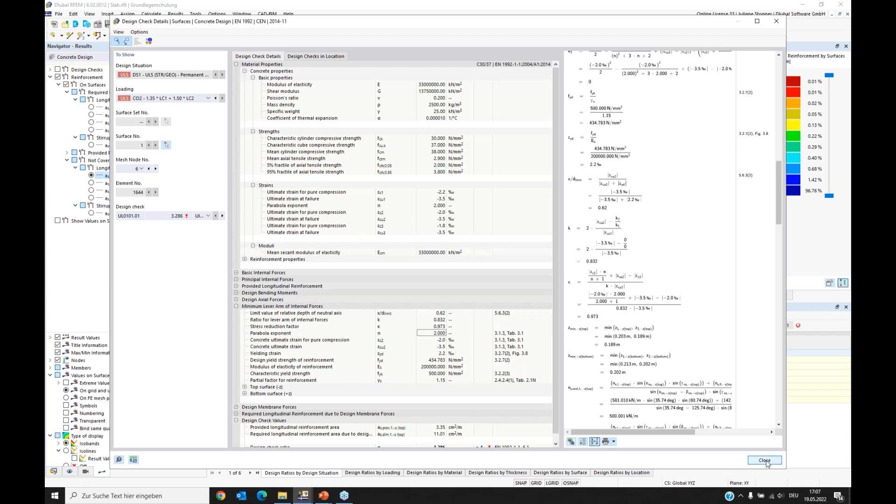And when you check this and you agree that there is more reinforcement needed, you also can put some local additional reinforcement, and we will do this now for these supports places.

Therefore, we go back to the data navigator again, and I can do a right click on surface reinforcement and say that I want to create a new surface reinforcement. And here we have the type, and now I don't want to put reinforcement on the whole surface. I want to use a free rectangular reinforcement. The material is automatically entered here.

What I want to do is apply a reinforcement only on the top, as I have the tension on the top, and I want to have it in both directions, and I will put 16 millimeters with a distance of 10 centimeters in both directions.

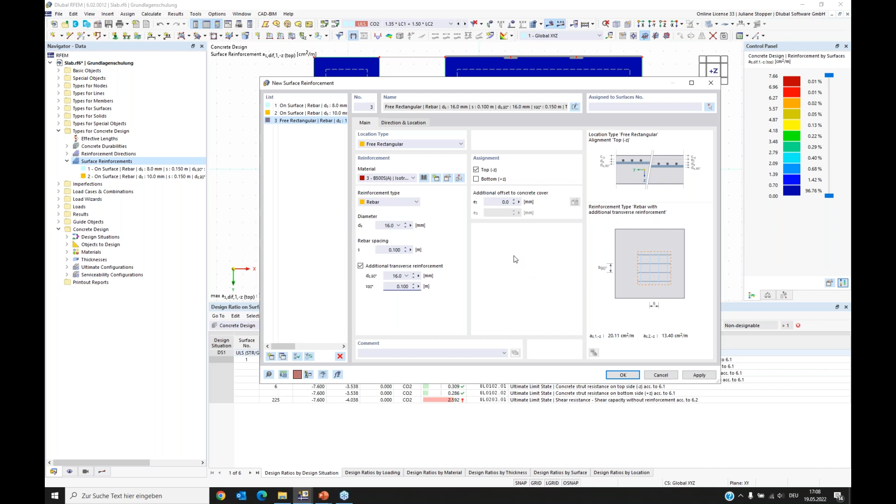So here you can set the diameter and the material for the reinforcement. And here you have to enter the position of your free rectangular layout of the surface. You also can enter which reinforcement direction shall be the first, but we can keep the default settings.

What I want to do is tell the position, and I prefer this setting now for our problem. Here I can enter the center. I can pick it on the working window, and I can enter the dimensions, and I want to have 3 in this and 4 in this. Okay, and it's going to be assigned to surface number 1.

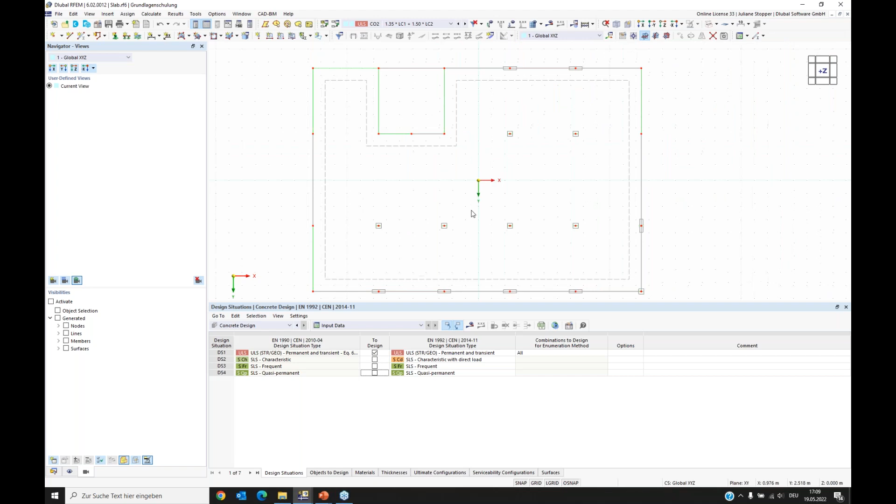I say okay, and the warning comes again, and I don't want to see results now. And I also will switch to wireframe view. I want to show you the reinforcement.

Therefore, I again activate the types for concrete design. And here now we can see we still have the surface reinforcement, and we have some additional reinforcement there. I can also switch off the surface reinforcement type on surface, and then I can see only my additional reinforcement.

I didn't want to have it like this. I want to have it with 4 meters and 3 meters, like this. Okay, and now I want to copy this.

As I see the distance, I want to have this additional reinforcement at all supports. So I want to copy it here and here, and the distance is the same. So I can use the move and copy function and say create copy, but not only one.

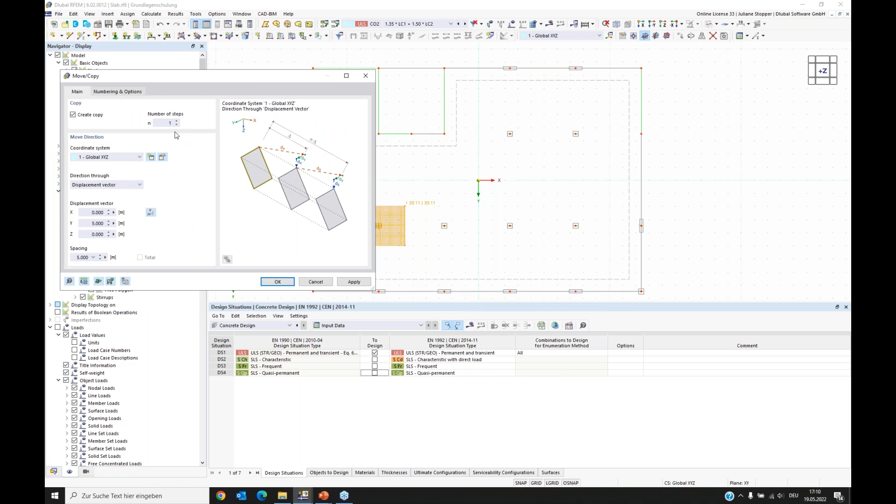I want to have 3 copies now, and I can tell the displacement vector it has to be a distance like this. I say OK, and now my 3 copies are directly generated.

I want to also have a copy up to here. I need some additional reinforcement here and also at the corners. Now it's only 1 because I don't want more in the next row. I give the distance, it's the same as from here. No, I cannot do it like this. The displacement vector has to be from here to here. Okay.

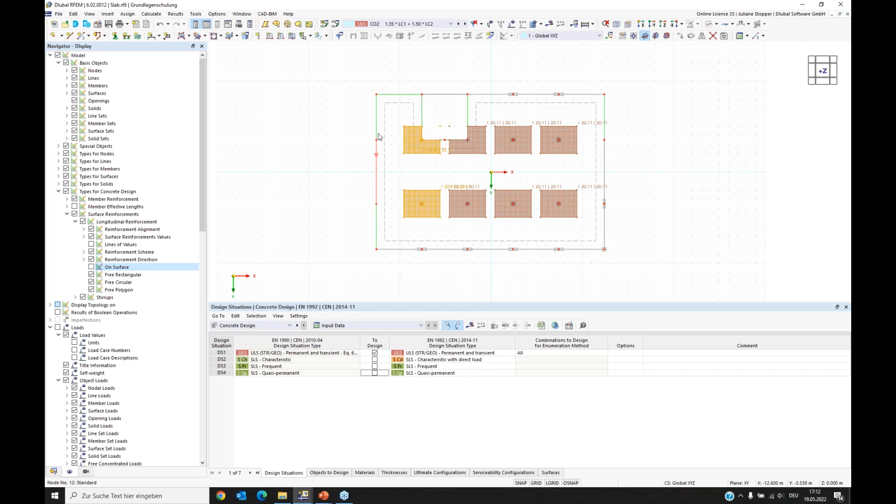And also I want to put some additional reinforcement here. It's due to the change of stiffness. We have the supports here, and here's no support. Here's the L-beam, and again here comes supports. We also have some singularities here. So I also put a copy there.

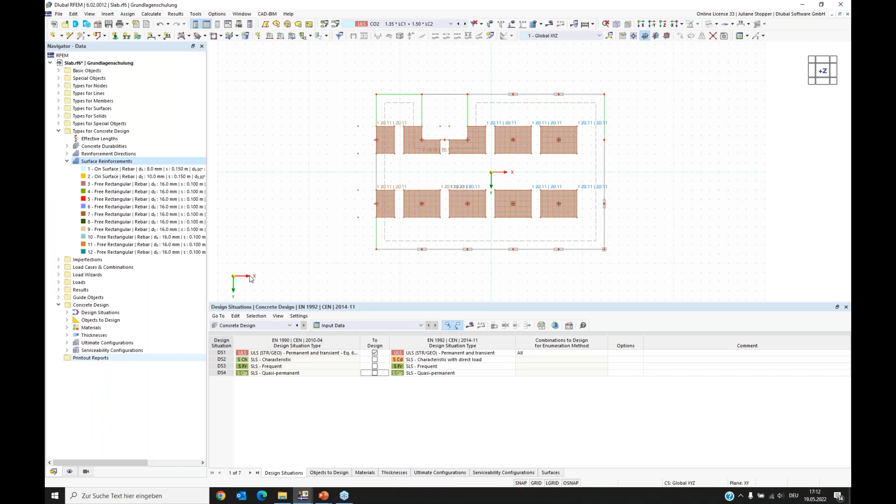Okay, so this is it. Now we can again calculate it and check the results.

I again switch off the reinforcement, and we will go into the design checks and check the top. I have to switch on the design checks, switch off the reinforcement, and now we see the first direction on top, and also the second direction at the top.

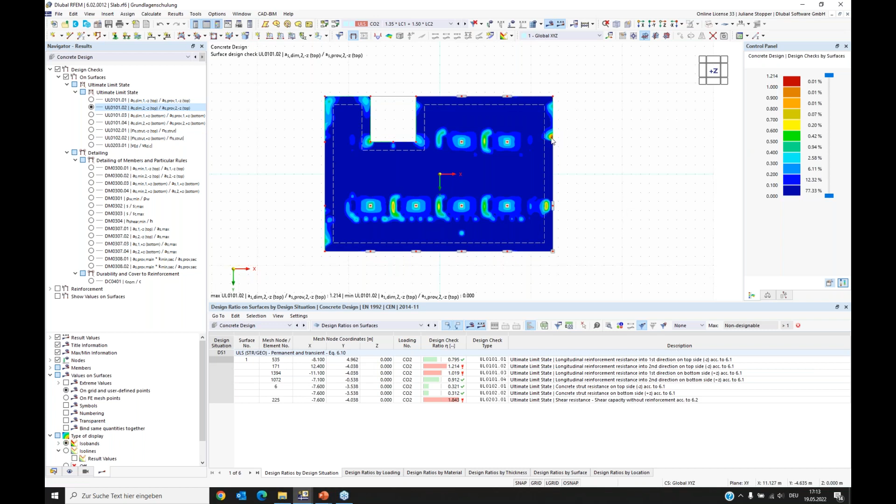We see that at very small places we have some higher values, but mainly we fulfilled the requirements of the standard with our additional reinforcements. So I want to now keep this design.

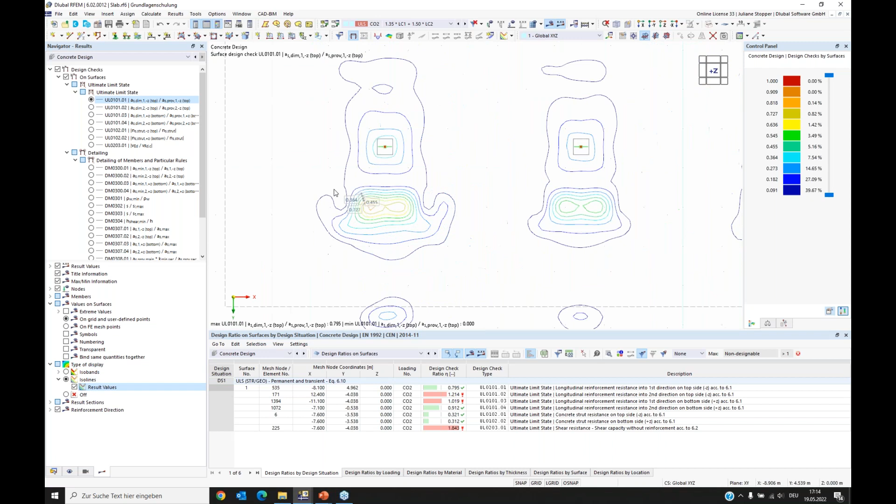I only want to show you a last thing. You can also change the type of display. When you want to print it, for example, it's not very comfortable if you have so much color in it. Here in the navigator results at the bottom, you can change the type of display. For example, you can change it to isolines, and you can say that you want to see the result values. Then you have the values for each line, and it's more easy to print into your report or something.

And we have another option which is comfortable for this. You can show values on surfaces. Now it's a bit crowded, so we close this. It showed so many values because it shows the values dependent on the grid within this setting.

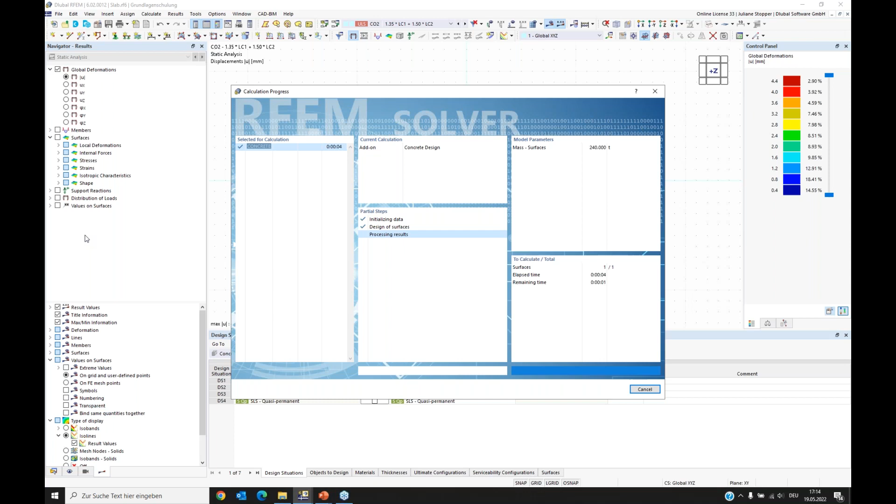And the grid we can change in the surface here. We can say we want to have a grid with bigger distances, so there will be less values shown. And we can shortly calculate them. Then we can also use the values on surfaces, which is nice for printing it, for example. Okay, so this is it.

This is what I wanted to show you as an introduction into the concrete design for surfaces, for slabs. I would like to give my word back to you, Daniel. I think we learned a lot.

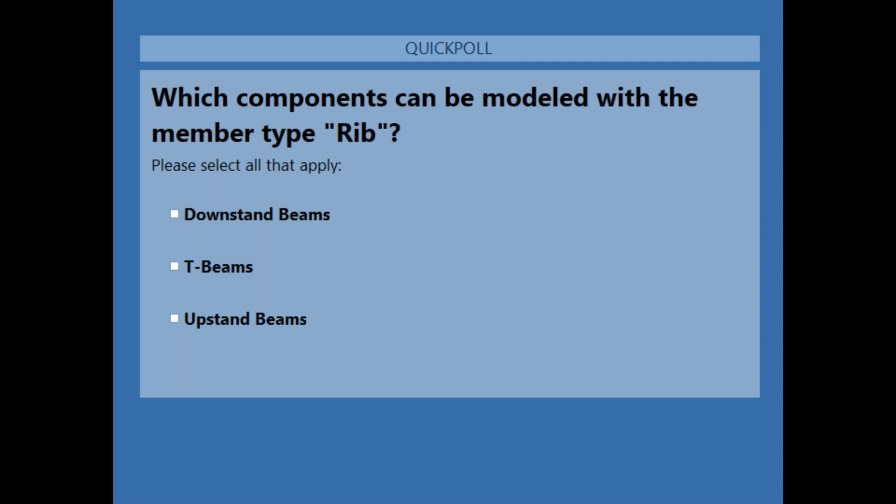So which components can be modeled with the member type Rib? Several answers can be possible. Okay, so most of you have voted.

I close this, share the results. So all 3 questions are correct. So with the member type Rib, you can design downstand, but also upstand beams and T-beams. When you want to consider the integration width, you have to use and consider the member type Rib. So the next part is this one.